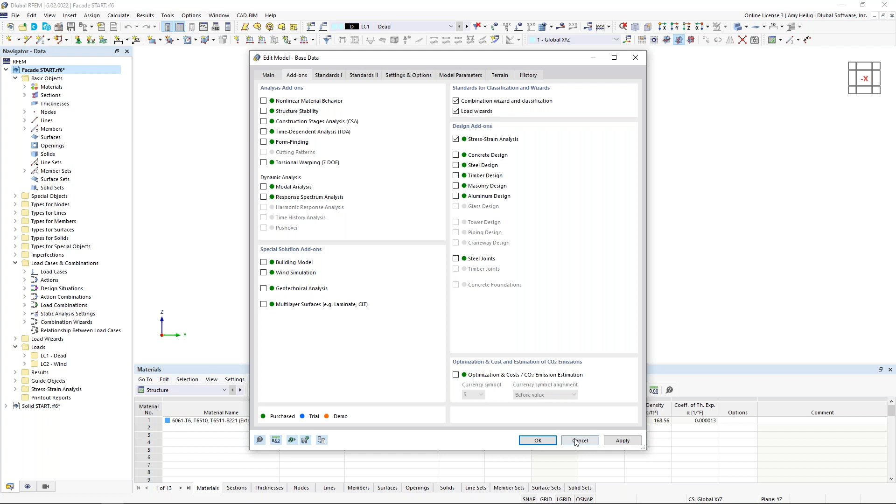Once we've activated that, we can see our 1D member elements modeled here in our graphical window. If I turn this into wireframe view, these are all going to be one-dimensional elements, and this is some type of facade wall.

I have defined the material here for all of these members as 6061 T6, and this comes directly from the ADM standard. If we take a look at our material database, notice I use my filters on the left to filter to the ADM, and under the 6061 category, I chose this particular material for extrusions.

If we take a look at the cross sections defined within this model, we have a couple of them here. These are basic parametric sections where I could input the dimensions, and the program will automatically calculate the cross-section values for me. Same concept for this second cross-section, notice I just rotated it 90 degrees here.

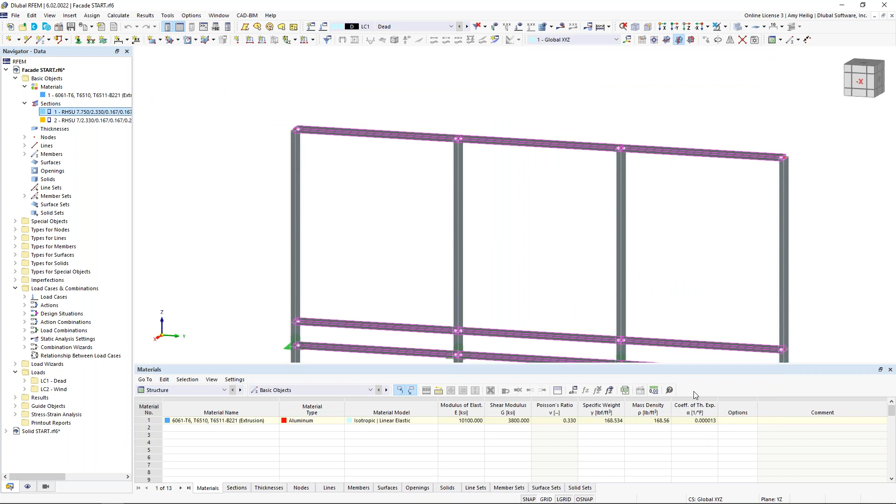So I have modeled all of these members, and the program has gone ahead and broken some of these apart here. Perhaps we'd like to design these columns as one continuous member, and even though those members are broken apart, it's not a problem, as we can create what's called member sets. If we highlight all of these single elements here, and we'd really like to design them as one continuous member, we can always right click, and under the member option, we have what's called create member set.

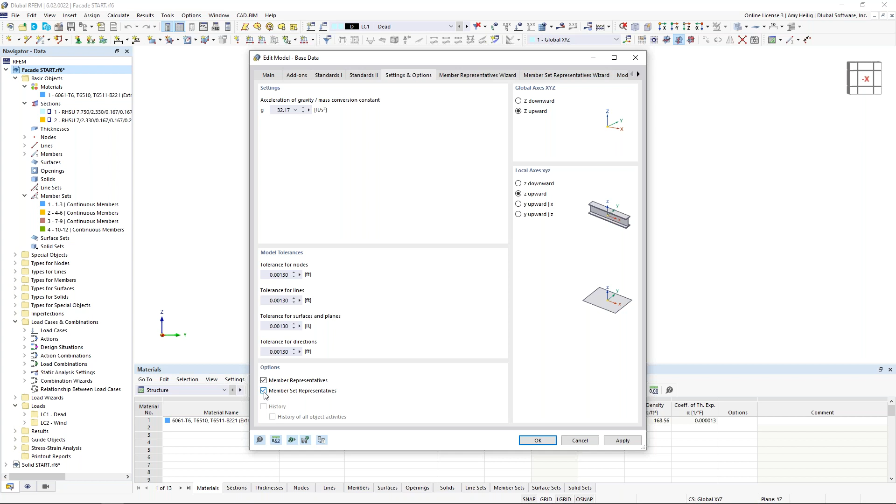The program will automatically group all of those together, and now we see them available in our navigator on the left. I also want to go back to our base data here by right-clicking on the model name, and under the settings and options, I'm going to turn on the member representative and the member set representative, so notice we have a couple additional tabs up here at the top.

The program can group together members that have similar materials, cross-sections, lengths, as well as several other options. Once we activate these member representatives, we also see them available on the left-hand side, and if I turn this into wireframe view, we'll also see those red and blue symbols grouping those similar members together.

And this will come into play later on with our stress design. I've also applied a couple of supports here. You'll notice the nodal supports applied at the center line of these small segments, and then we have a sliding nodal support down here at the bottom. So now moving on to the loads.

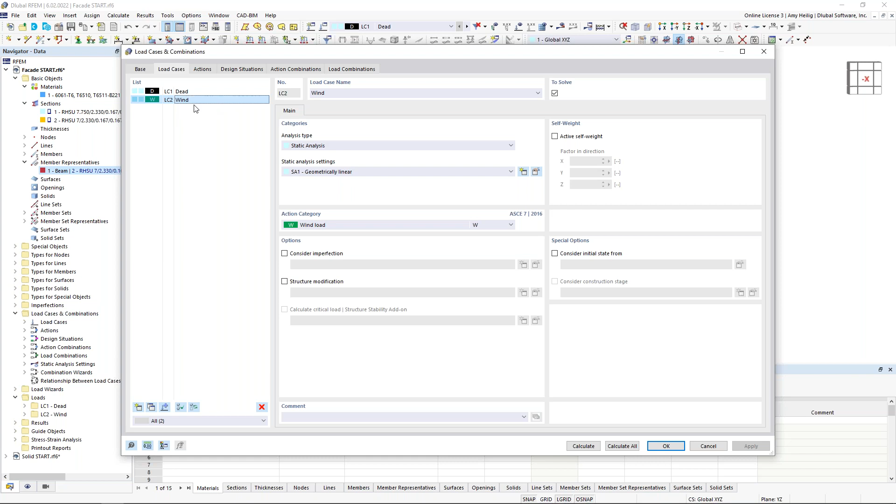I have created two basic load cases for our facade wall here, just a basic dead load. Notice self-weight is active, and I've also created a wind load case. So once those load cases are created within this dialog box, we would actually apply the loads to the structure. And again, for the sake of time, I went ahead and did that.

So if we turn on our loads for dead load, you can see that this facade wall is likely going to be supporting some type of glass panel. So I wanted to attach the glass panel and represent them as basic point loads along these horizontal members.

And if we double click on these loads, you'll see here that we can set the load type to force, but the load distribution is set to concentrated, where I can set the number of point loads along the member length. So I set the magnitude here at -0.8 kips. In the global Z direction, we have 2 point loads along the member length set at a distance of 10% of the member length, then an additional 80% of the member length.

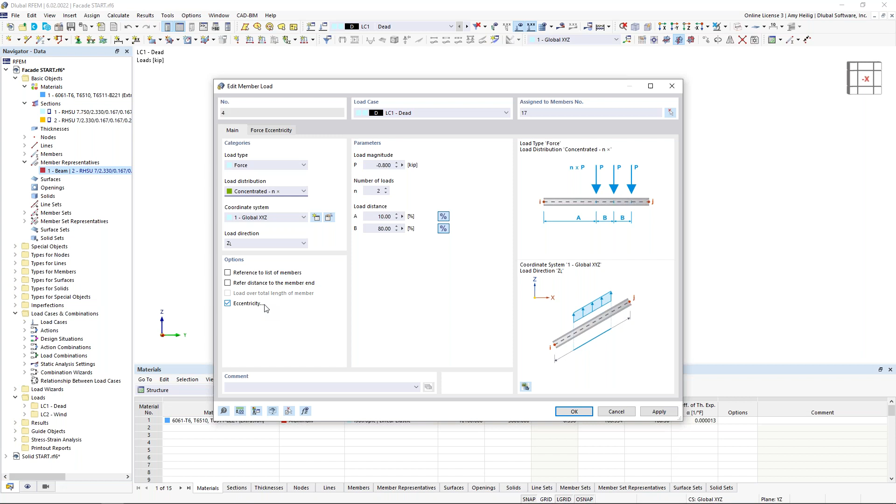And not only that, but with these glass panels that we're trying to represent, perhaps they're not necessarily applied right at the center of these members. So we have the ability here to turn on the eccentricity of these point loads, and now we get an additional tab where we can apply an eccentricity. I've set this to 6 inches in the local Z direction of the member based off the center of gravity. So now we have an additional torsional moment applied to these members based on these glass panels being attached there. You can also modify this to the shear center as well.

So I've applied these point loads not only to the bottom horizontal members, but you can see them applied up here, the upper members as well. Moving on to the wind load, we can see that wind load generated here as a lateral load, and I took advantage of our load wizard over here in the project navigator.

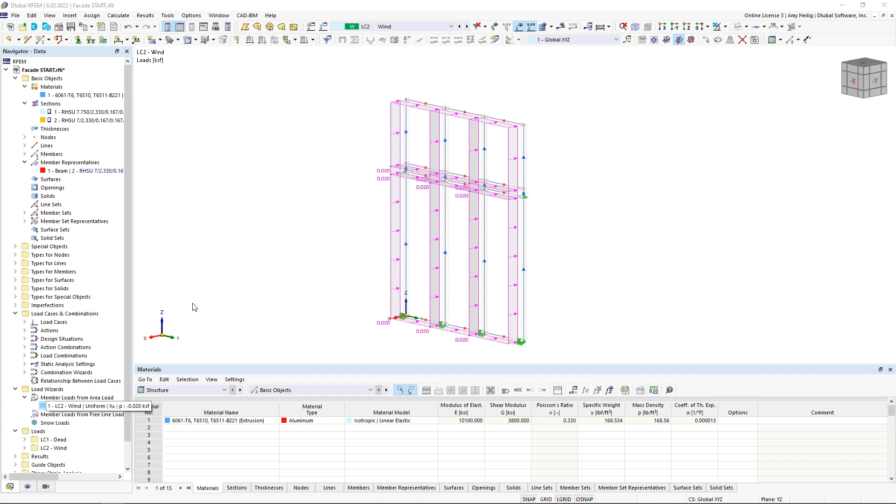What's called the member loads from area load. So if we take a look at this applied load, you can see here that I've set the load direction in the global X direction here based on the global axes. The load magnitude is set at 0.02 kips per square foot.

And then under the second tab, this is where we have two options. Either we could use the ability to select the corner points of the area load, or we can select the cells graphically, so the program can actually detect here these closed cells between members. We can graphically select them with our selection options, and when we do this, all of those cells are automatically populated within this table.

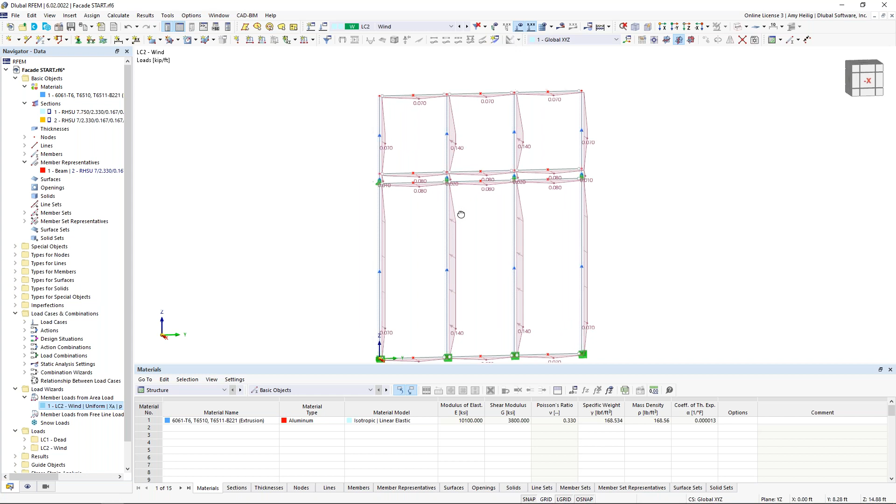So what we'll see here is that applied lateral area load based on a closed area for these members shown here graphically. We can always right click on this load to display separately. So essentially this is going to be the member loads that are applied based on the tributary area of each one of these members. But we can always right click here to uncheck this display separately for a little bit of a cleaner look.

So now that the loads have been applied to the structure, let us go back into our load cases and combinations, and we're gonna back up a step under this base data. Currently I'm generating the load combinations automatically according to the ASCE 7, but you can see here we can select the NBC, Eurocode, and many other international standards. So when this option is checked, those load combinations will be automatically generated according to the standard.

The design situations are really important. We have two design situations automatically created, LRFD for our factored load combinations and ASD for our unfactored load combinations. Notice we activate these design situations for the add-ons. So the add-on that we turn on, remember, was the stress strain analysis, so we'll be using this design situation once we get into that add-on for the design portion. Now, if I'm not so interested in my unfactored load combinations, let's say serviceability is not really a concern, we can delete this design situation, or we can simply deactivate it up here in the upper right-hand corner.

Under the last tab, the load combinations, this is where we see the load combinations individually listed out based on the ASCE 7 and only according to the load cases we have defined, that dead load and that wind load.

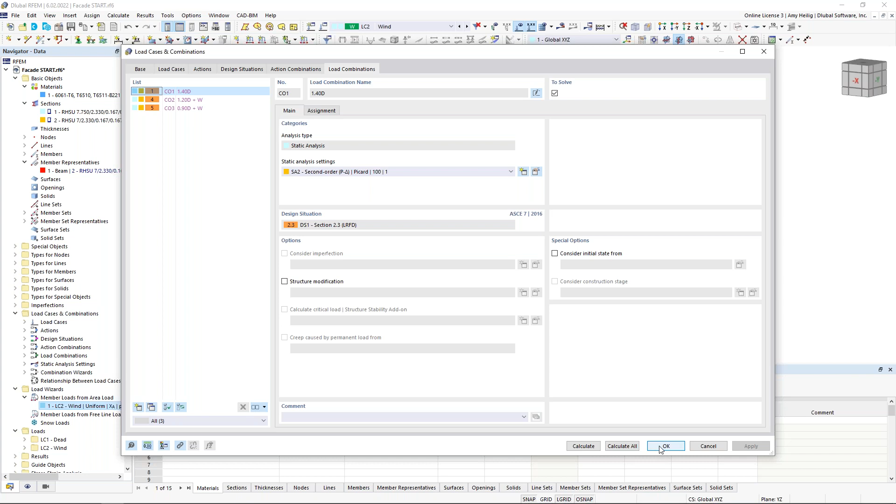Now that the load combinations as well as the design situations are set, we'd like to move on to the stress strain design configuration. We're technically ready to run the analysis, but the huge advantage of RFEM 6 is the integration of these design add-ons so that we can run one continuous workflow.

So what I'd like to do is right click on my folder here to collapse all these folders, so maybe it's not so overwhelming. Because we have activated that stress strain analysis add-on, we now see an additional folder over here on the left, and included in this list is what's called the member configurations. We'll double click on this to take a look at the default options.

Notice that these are all of the available stresses that we can calculate for these members, and that includes normal stresses based on axial loads, based on bending loads. The list is rather long, but we've taken the liberty here to suggest a few of these stresses that you might be most interested in.

For our example today, let us assume that we really are only interested in designing the von Mises stresses. So when I take a look at this, I make sure my checkbox is on, and notice for all these stresses, the equations along with the variables are listed over here on the right. And in the second column here is where we set the limit stress type.

Currently it's set to the limit equivalent stress. What this means is the program is going to refer to that ADM material to determine what the limiting stress value is. Now, alternatively, we can set this to user defined, and I can simply type in the user defined limit in this third column. But let us go ahead and leave this for now set at the limit equivalent stress.

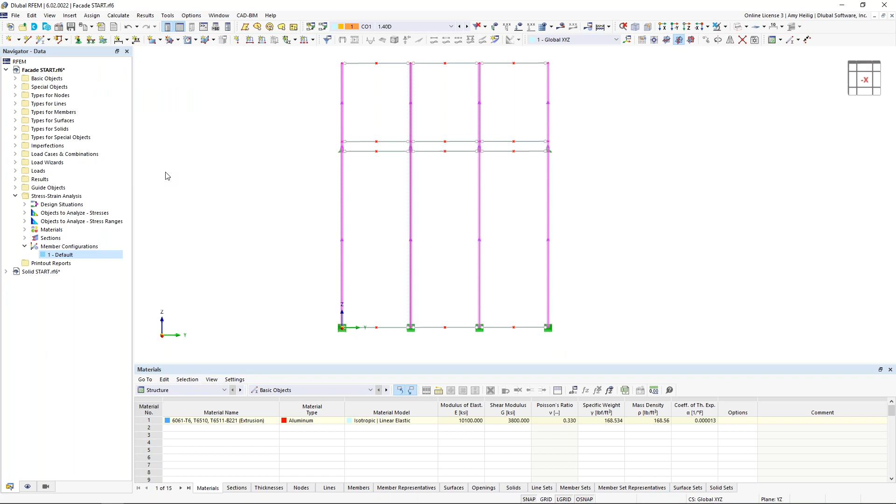The other nice thing about these configurations is that we can give this one a name. We'll call it von Mises. We don't necessarily have to apply the same configuration to every single member in the model. So if I'm interested in applying the von Mises here only to my vertical members, I can graphically select them here, and once I click OK, we'll see those members populated in the upper right-hand corner.

Now I can make a copy of this configuration, and instead of von Mises, let us turn on the equivalent stresses based on the Tresca hypothesis theory. We see the relevant equation here that will be used. We can give this one a name that will be called Tresca.

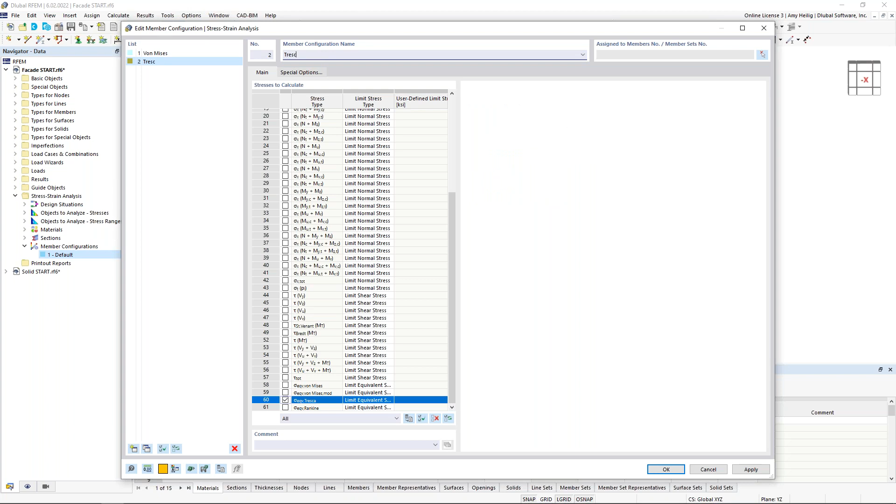And we're going to assign it to all of our horizontal members. So we can select these members one by one here using our selection box. Once we're done with this, we click OK and we see the members populated in the upper right-hand corner.

So we are now ready to run our calculation. We can go to calculate, calculate all. The program will generate the mesh. It will move through the load cases and combinations for the static analysis, and then it will move through the stress design.

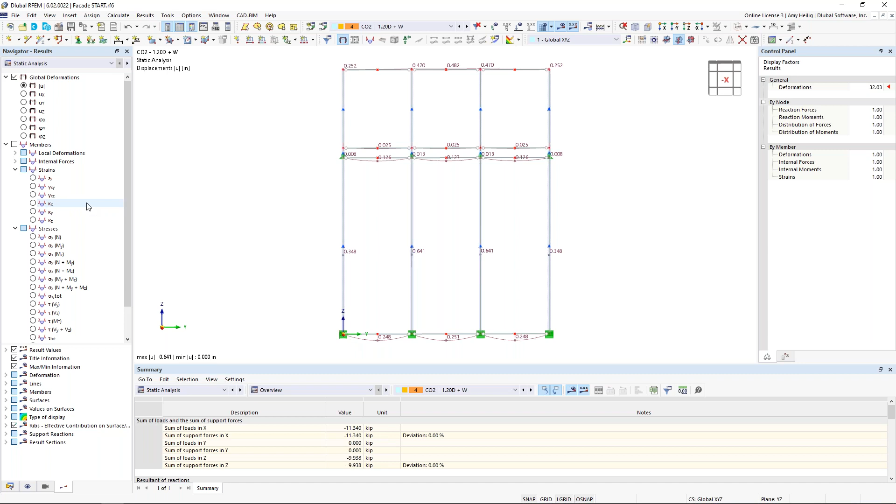So once this calculation is done running, you'll notice that we can view any one of these load combinations, for example, from our drop-down menu. And over on the left, we have both the static analysis and the stress strain analysis. So if we start off with the static analysis, we can view information like our global deformations, our support reactions, but of course, we're interested in here all of the available stresses as well.

So we can view these stresses on the member, including normal stresses, shear stresses, of course, the von Mises stresses. So again, this is the static portion of the analysis.

But we're also interested in the stress design based on those configurations that we've just set. So what we can do here is jump to the stress strain analysis within this dropdown. And if we take a look at our table results, you'll notice that we actually get an error for each one of these stress ratios. It just simply says non-designable.

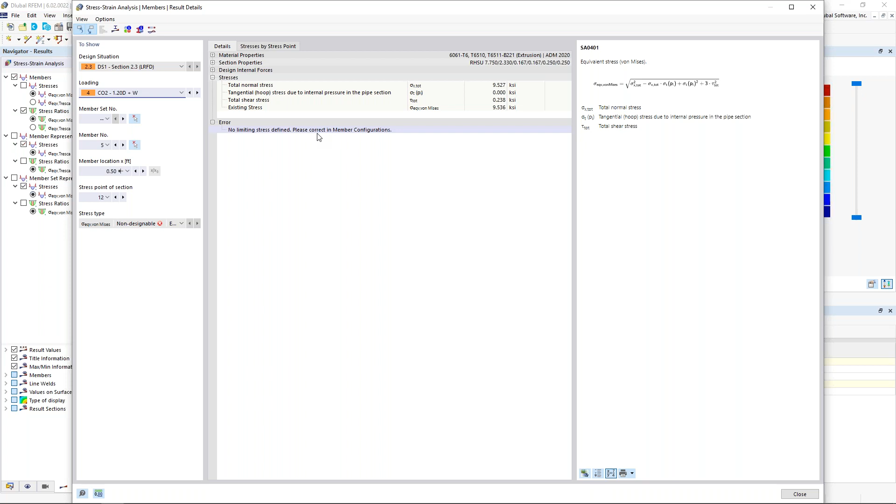So we'd like to take a look at this in a little bit more detail. I'm going to go into my result details here, and this is going to give me a little bit more information. It tells me no limiting stress defined. Please correct in the member configurations.

Well, if we refer back to our aluminum material, and I'll visit this here under the basic objects, the materials, we take a look.

You'll notice that the material values have many different values set here under the strengths, depending on if the member is in tension, compression, shear, and so on. Aluminum materials are a little bit different than, say, what we would see with steel. A36, for example, has a very clear yield strength of 36 KSI, but aluminum ADM materials do not, so the program simply doesn't know which one of these to refer to.

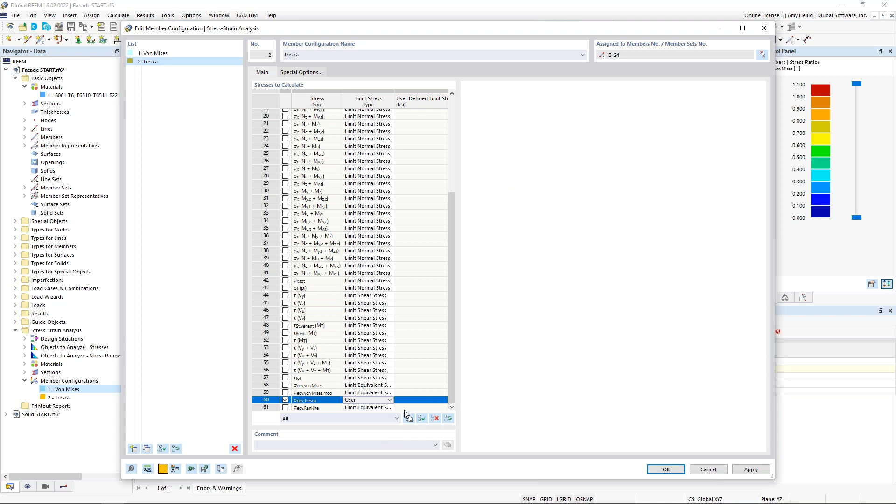We can easily fix that by going back to our member configurations. Under our von Mises configuration, instead of using the limit equivalent stress, we set this to user defined instead, and pick one of those strength values for that ADM material, such as 35 KSI. Under the Tresca, we need to do the same thing, setting this to user defined and also 35 KSI. We click OK.

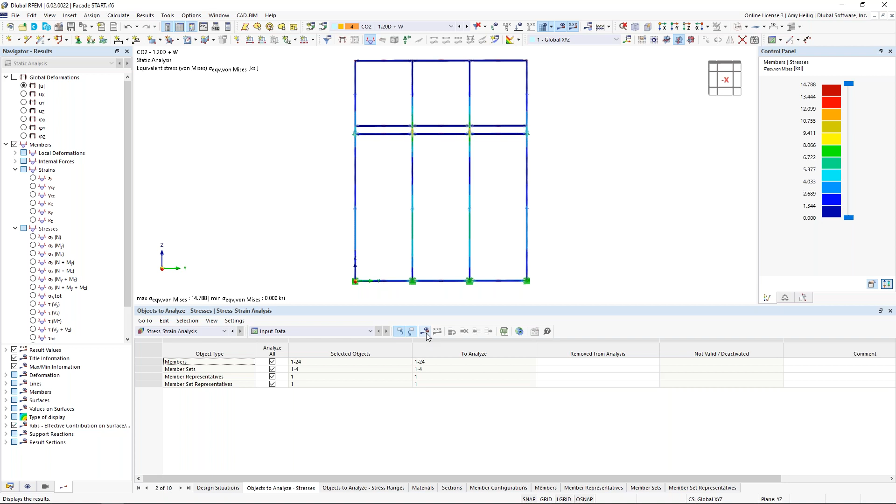So if we revisit our stress strain analysis, we see our input data and the design situation. Remember that LRFD design situation, and we're designing all of our members. Our static analysis remains the same here, but we do need to rerun the design portion according to this add-on.

We'll go ahead and initiate that, and now we should see some results available in our table format. We can take a look within this dropdown at the stresses on members. So we have our column here of existing stresses for each of these members, but we also have the limiting stress of that 35 KSI, and ultimately we're getting a stress design ratio.

Now we also can view these stresses by member set. Remember those continuous members we created for these vertical columns - we're also going to see our stress design ratios for each one of these continuous members. If you also remember, we activated the member representative, and we're only getting one value here. We can think of this more so as an envelope solution, grouping together all of those horizontal members, giving you one value for the existing stress, the limiting stress, and the stress design ratio. Same concept for the member set representatives.

The other thing we can view for any one of these results in our table format is to take a look back at these result details. If you remember, this is where we got more information about our error message, but now that it solves, what we actually see is the stress ratio. We see that same equation given to us on how we're going to calculate, for example, the von Mises stresses. We see all of our variables given.

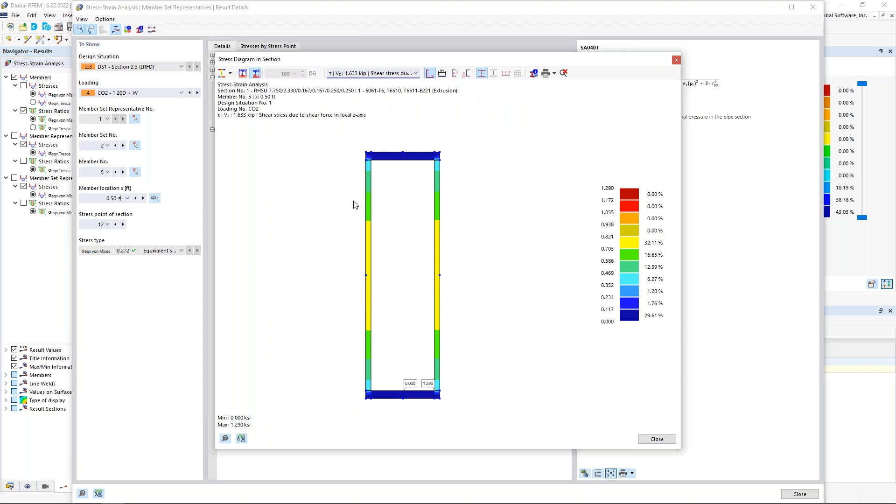What else is nice within these details is we can turn on the stress diagram within this section. So currently we're looking at that cross section at the location of x equals 0.5 feet along the member length, and we're currently viewing those von Mises stresses graphically, but we can use the dropdown to choose the third option, stresses, here as well. This is going to allow me to view all of the normal stresses. Perhaps I want to take a look at the shear stresses. We can add this information to our printout report and get a little bit more information about what's going on for this particular section at this X location.

Now, of course, in addition to the table format, we have all of our information shown graphically here under the stress strain analysis. For example, we can view the stress design ratios that are currently turned on according to Tresca, or perhaps we want to turn on the stress ratios according to the von Mises.

Okay, so that will wrap up this first example with one-dimensional members. For our second example, I'm actually going to create a new file because we will model this one from scratch. Pretty basic structure, so we'll give this the model name of base plate, whatever that may be, and the type of model will be set to 3D. Under the add-ons, again, we want to activate the stress strain analysis, and we're also going to activate for this second example, the nonlinear material behavior.

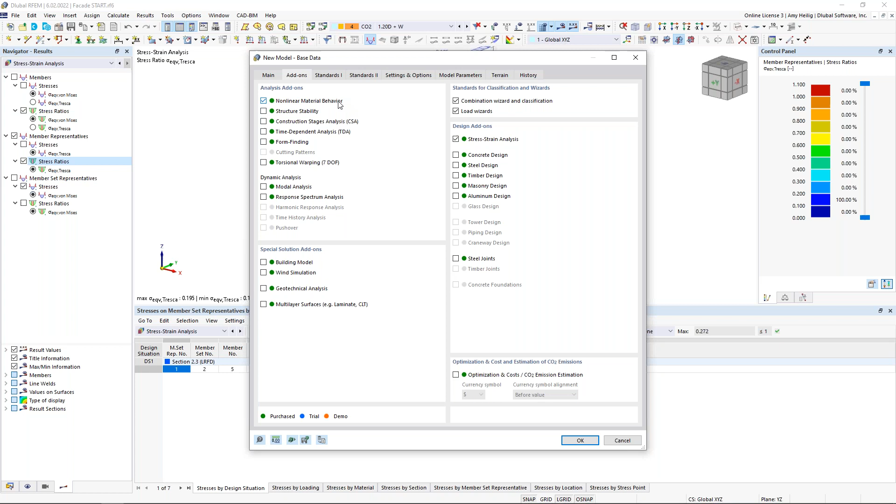So we'll get into this a little bit later on, and we can click OK. So now we're presented with a brand new model here within RFEM.

The first thing I'd like to do is right click on my grid settings down here at the bottom. Currently everything is based on a spacing of 1 foot, so I'm going to go into my units and instead of using the length unit of feet, I'm going to change this to inches because we're going to be working with a much smaller scale here. I click OK, and instead of my grid point spacing at every 12 inches, we'll set this to every 1 inch, and we click OK.

So we zoom in here, and now we see our much smaller drawing grid. We'll begin by drawing a new surface within our toolbar up here, and we'll choose rectangle via center.

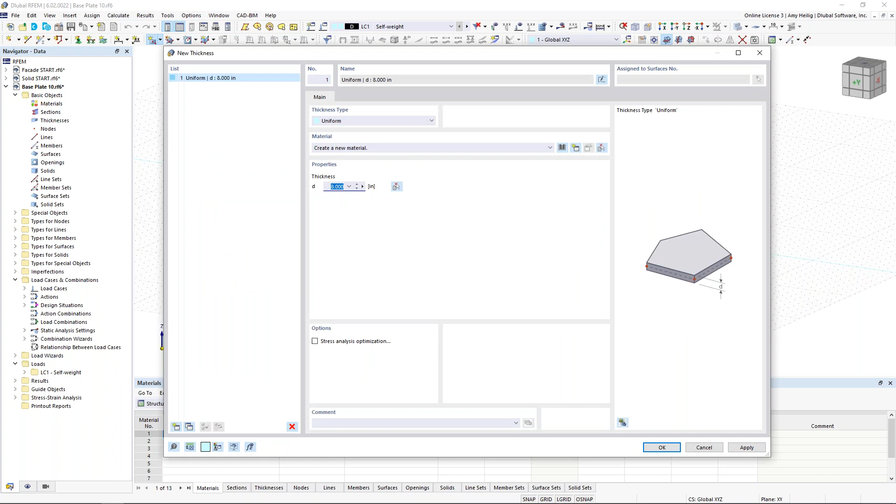We need to generate a new thickness and material for this surface, so we create a new definition type here. The thickness is going to be set at 0.5 inches, and we need to create a new material from our material database. We can use our filters on the left to choose steel, to choose AISC 360 for example, and we can choose A36 for plates. Now that this thickness and material have been defined, I can click OK through these dialog boxes.

I will snap at the origin here, and I'll make my second click at a point of 10 inches in both the X and Y directions, and we have our first 2D surface element generated here.

Now I'd like to add in some openings. This will essentially be our base plate, and we add in the openings to represent where those bolts will connect the base plate to the underside of the surface.

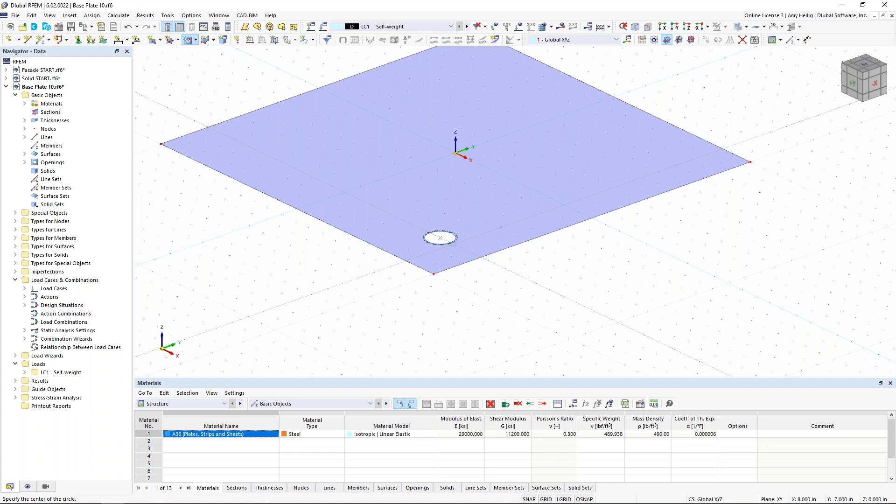We can do so in a similar manner by creating a new opening, and we'll choose the circle option. Then I can just click directly on my drawing grid, and set my radius by typing it in on my keyboard, such as 0.75 inches. I hit enter, and now we see that opening generated here on the surface.

I'm going to represent my bolt elements with a new nodal support, so I create a node to begin with by directly clicking here right at the center of that opening. I right click to exit, and we're going to create a new nodal support.

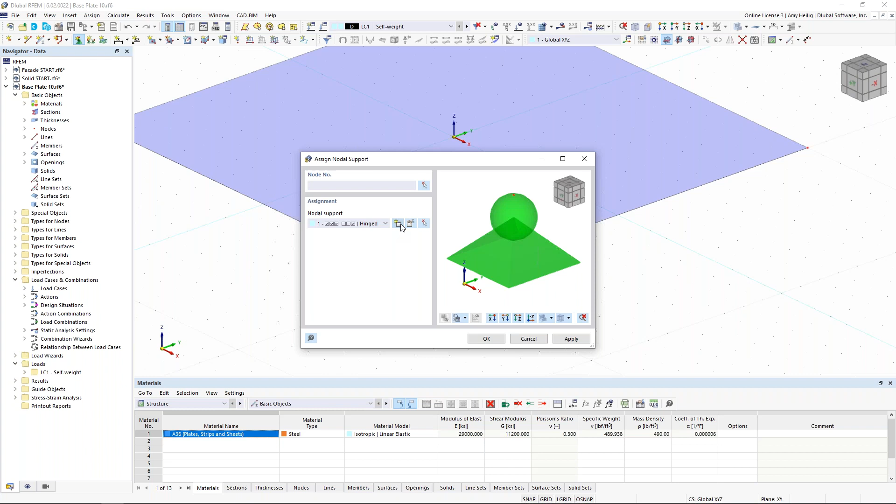I'm going to generate a new nodal support definition here as well. What I'd like to do is restrain translation in the global X, Y, and Z directions, but I'm going to release rotation about those global X, Y, Z. So this pin nodal support is going to represent that bolt taking over those tension forces. I click OK once again.

I'll snap here to that newly generated node. I right click, and we can even right click on the display of this nodal support to decrease the size to something much smaller, so it kind of fits in with the size of our base plate here.

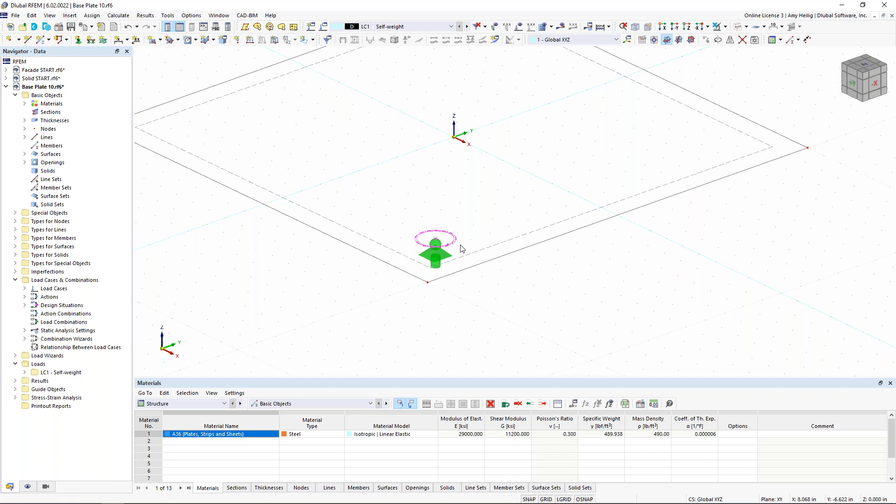I'll convert this to wireframe view, and I'm going to highlight all of these elements that I just generated. What I want to do here is make a copy of the opening and the nodal support, so we'll go to our rotate copy tool. We will create 3 copies, rotated 90 degrees about the origin. We click OK, and now we can see the rest of those openings and nodal supports generated here.

Now, the problem is that none of these nodal supports are currently connected to the base plate. That's just because they're sitting in the middle of these openings, but it's not a problem because what we can do here is choose the option to create a new surface by selecting the boundary lines.

And instead of the stiffness type being set to standard, we can choose this option here, rigid. So we'll fill in those openings with a rigid surface. Notice I don't set a thickness, I don't set a material - that's simply because the stiffness is really, really high for this particular stiffness type. So when I click OK, I can just click around these openings here to essentially connect that nodal support back to the base plate.

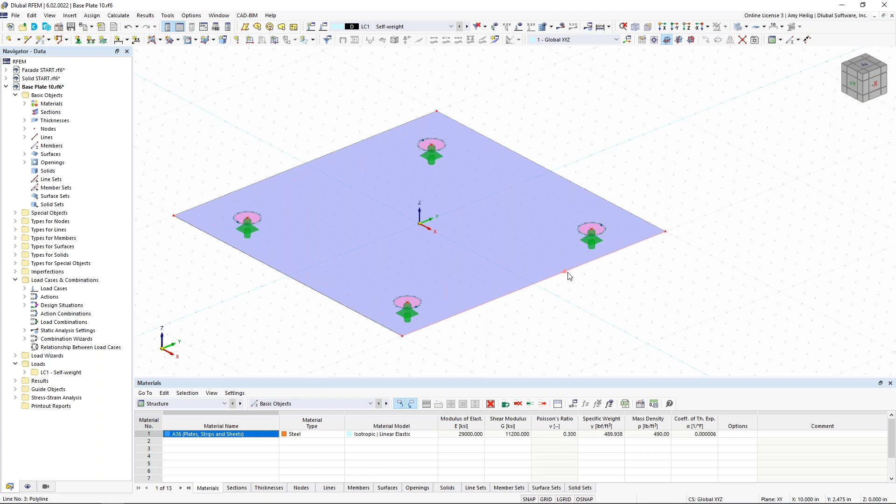So now we'd like to move on to modeling the column element. There are many different ways to do this, but I'd like to show you a quick trick we have in the program. I'm going to modify my drawing grid in the vertical direction, and create a new single member, just like what we saw in the previous example - a one-dimensional element.

Under the section is where we create a new cross section. Instead of one of these parametric sections, I'll take advantage of a standardized section, which allows me to use my filters similar to our materials on the left-hand side. I can filter to AISC 15, choose a W shape, scroll to the bottom where all shapes are listed, and choose a W8 by 35.

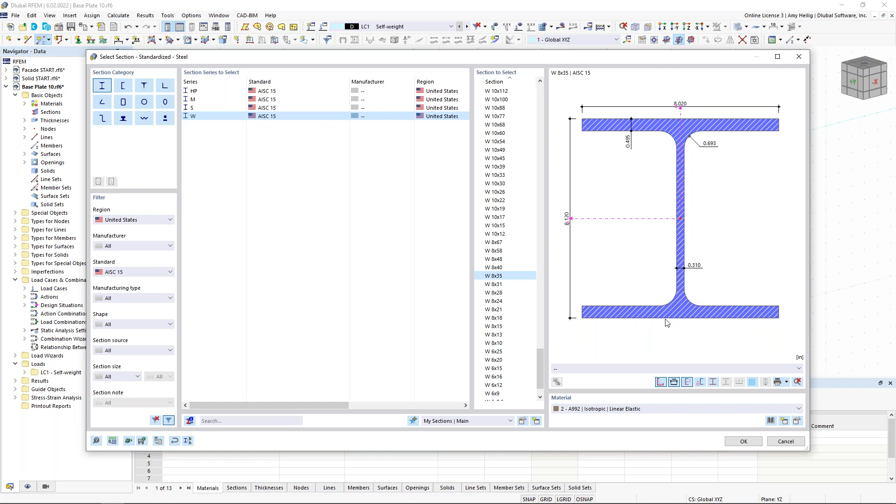Now we also need to generate a new material. We access our material database using our filters on the left, but this time choose A992. Click OK, and that new material is associated with this W8 by 35. I click OK, snap at the origin, and my second point is up at 40 inches in the vertical direction. We have our column generated.

But the problem is when I turn this to wireframe view, this member is just a one-dimensional element modeled at the centroid. We want to convert this to 2D surfaces so we can do an in-depth stress analysis and design. We can right-click on this member, and under the members menu, generate the surfaces from that W8 by 35.

Notice everything was converted to those 2D surfaces. The flanges, the web, everything from that W8 by 35 was converted into surface elements, including the thickness as well as the material. So we don't need to make any modifications, assuming we still want that same cross section.

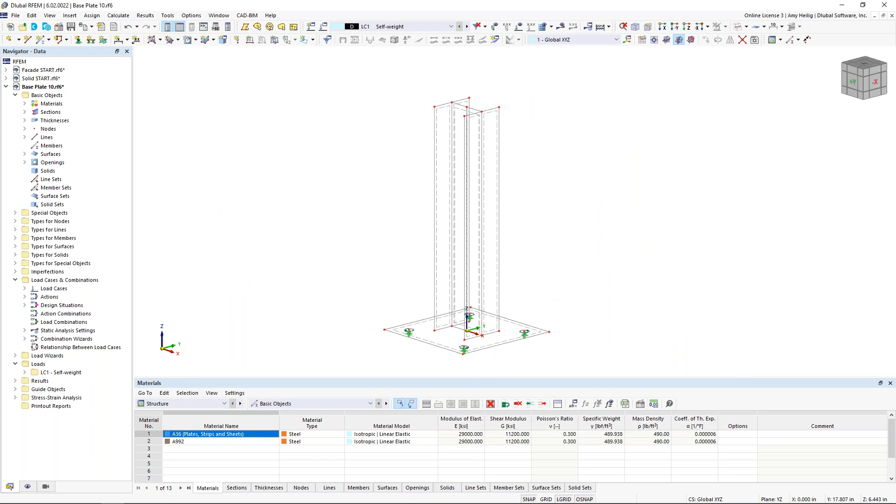Now that we have modeled this column, we need to apply a surface support down at the bottom. With downward deflection, this base plate is going to bear on some other type of surface that we didn't model today. But in uplift, we want that surface support to fail, and instead we'd expect our bolts, represented here with nodal supports, to take over those tension forces.

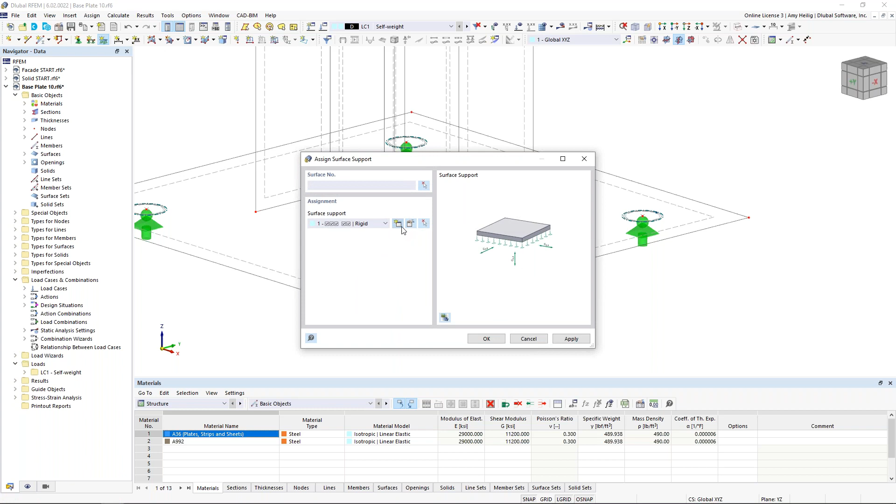So we create a new surface support within our tools, and create a new definition type. We'll restrain the shear based on the local XZ and YZ axes of this surface. For my vertical translation, based on the local Z axis, I'm going to set a spring constant of 1e6.

It's recommended in almost all cases with a surface support not to fully fix it in the vertical direction - we get better convergence in the calculation when we set a spring constant instead. And we want to take advantage of this nonlinearity. RFEM is a nonlinear analysis program, and all geometric nonlinearities are automatically included within the base program.

This is where we can set failure if positive contact stress occurs in the vertical direction. So with uplift, we should see that support completely fail, but in downward deflection, that support will be engaged again. We click OK, snap on that base plate, and see that surface support applied here.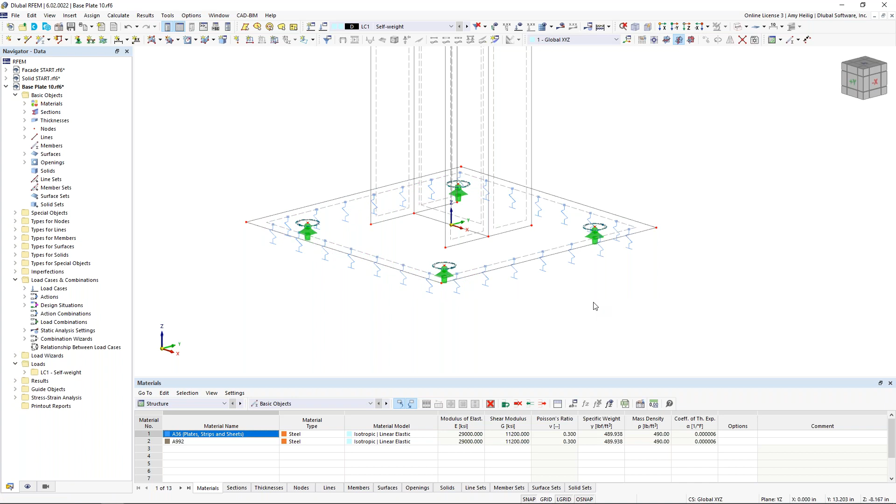Similar to the nodal supports, we can right-click and use our slider to decrease the size of this. We can also increase or decrease the number of elements we're seeing here depending on what we see fit for our model. All right, so essentially the modeling portion is complete.

Let us touch on the FE mesh. If I go to calculate, generate mesh, what you'll see is that the mesh is entirely too big - we're getting very few mesh points, which is not going to be an accurate analysis. So it's very clear that we need to refine this FE mesh.

Going to calculate, we have mesh settings. Instead of the default 1 foot or 12 inches for the target length, we can set this to something much smaller, such as 1 inch. I click OK and apply, and the program will generate that FE mesh, which looks much better. But if I zoom in on these openings, I really only have 4 mesh points around the circumference.

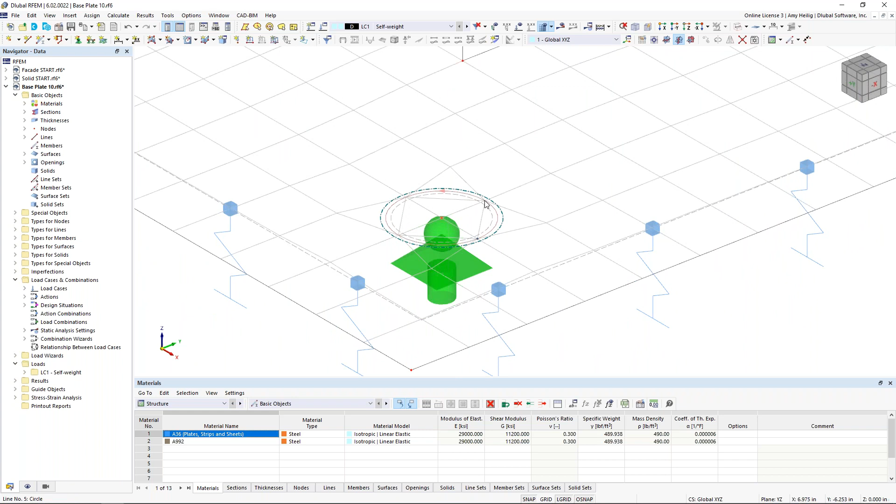So perhaps we want to refine the mesh a bit more around these openings. I can hold down my control key to select all 4 of these nodes, then double click to activate the mesh refinement under these particular node numbers. We get a new tab where I can create a new nodal mesh refinement, setting the radius to 3 inches. The inner target length will be 0.1 inches, but we'll transition back to those global settings of 1 inch. I click OK, then OK again, and now we see the FE mesh refinement symbol shown graphically within the model.

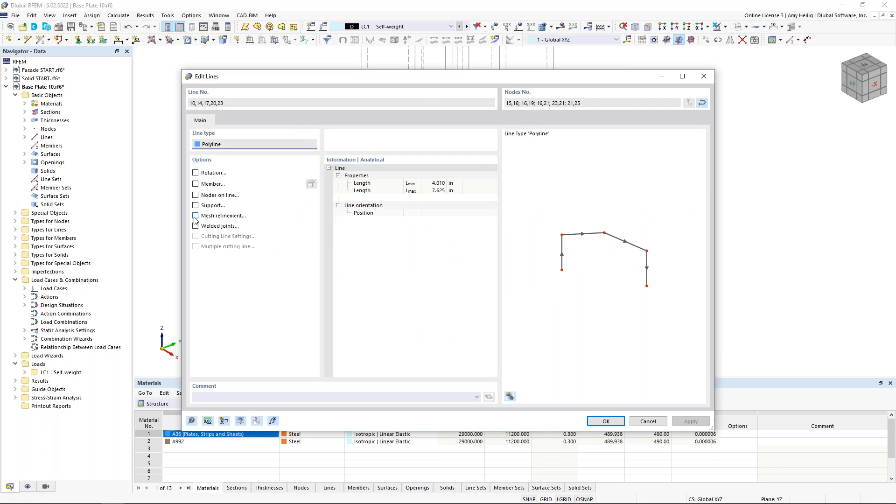Perhaps we'd like to do the same thing at the base of the column and refine the mesh a little further around these lines. I hold down control to select all of them, then double click to edit the line, and in a similar manner to our nodes, we can activate the mesh refinement for these particular lines. Under the mesh refinement, we create a new definition and set the target length to something like 0.2 inches. I click OK. Then we go to calculate, generate FE mesh, and we see a much more refined FE mesh at the base of the column as well as around those openings.

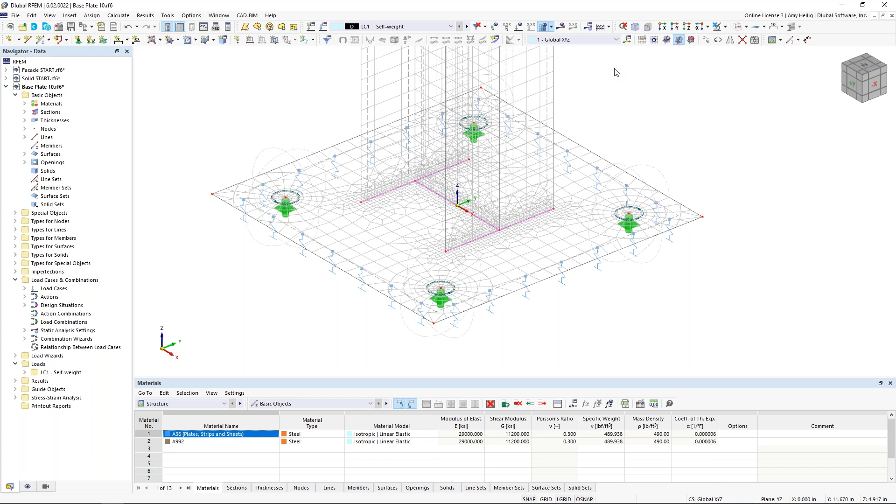So everything seems to be good to go now. Moving on to loading, I'd like to visit my load cases and combinations. We have a default load case always created called self-weight, and we'll rename this one to dead load, leaving self-weight active. I'll create a second load case for our simple example today called live load, with the action category of live load. Now that these two load cases are generated, we'd like to actually apply the loads to the structure.

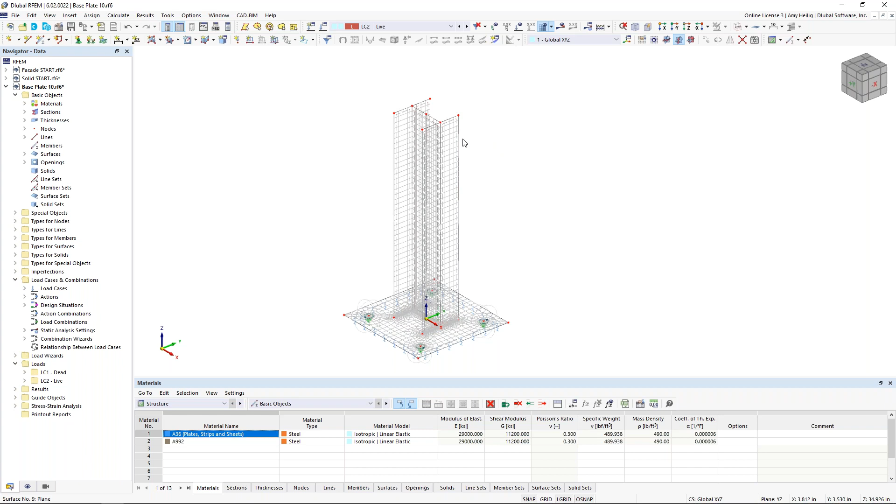The loads are going to be applied as a point load at the top of this column. But the problem is, if we apply a point load as the model is now, we're going to get a singularity because that load isn't distributed over the entire face at the top of the column. We can fix this by drawing a new surface, with the type as rectangle, and setting the stiffness type to rigid, same as we used at the openings where our bolts are located. I click OK, click once on the left of the structure and a second time on the right. If we turn this to a rendered view, we can see that rigid surface shown here.

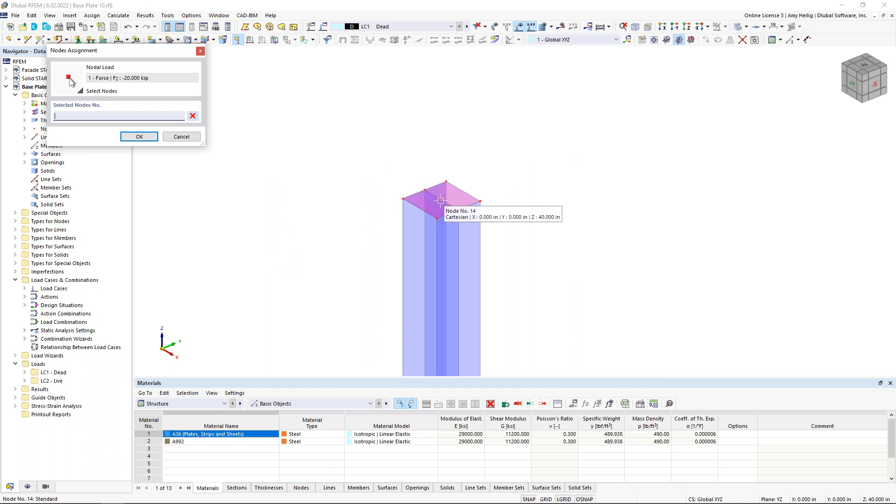Now I can create my first point load by activating a new nodal load. I get my dialog box where I change the load case to dead load, and set the force as -20 kips in the global Z direction, graphically choosing node number 14 to apply it. If I hit apply and next, the program automatically applies that load in the background, but I'm still in the same dialog box so I can use the dropdown to choose live load, modifying the magnitude to 5 kips in the global Y direction. I click OK, select this node, click OK again, and we see that lateral load applied here.

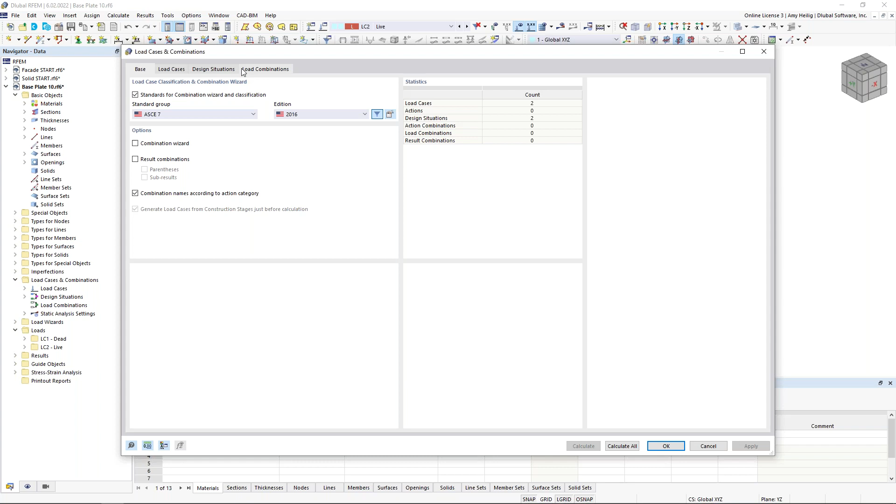So going back to dead load and live load, both of those loads should be sufficient. Going back into our load cases and combinations, we've created these load cases, but we want to combine them into a load combination, and we also need to check our design situations. Under the base data, if we'd rather manually create those load combinations instead, all we need to do is turn off the combination wizard, and notice a few of those tabs disappeared at the top. This gives me the ability to still create these design situations, automatically generated based on ASCE 7. But perhaps I'm not interested in my ASD design situation, so I can completely delete it.

I can even take this design situation here and rename it if I'd like, so we'll just call this one Design Situation 1. Maybe it's a little bit more code independent, but it's still active for this stress strain analysis.

Remember, we have to have a design situation that all of the load combinations are placed under for these add-ons. So looking at our load combinations tab, it's empty because we need to manually create these. I'll generate a new load combination here.

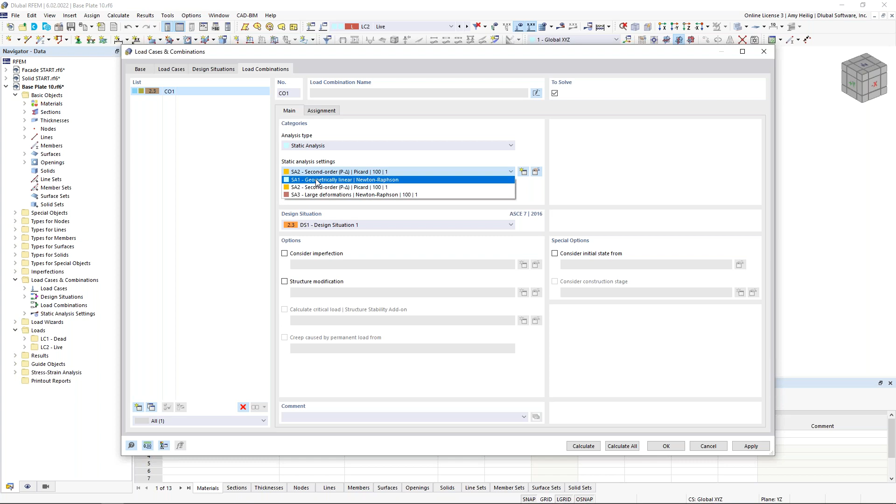Perhaps we change the static analysis settings to linear first order rather than second order. Under the assignment, we can select both dead load and live load. We could adjust the load factors if we'd like, but we'll go ahead and leave this as a simple 1.0 dead plus 1.0 live. We click OK, and now we should see that load combination available to us along with both of those loads.

being applied here graphically. All right, so let us talk about those stress strain configurations. Remember, because we have activated the stress strain analysis, we have this folder available to us over on the left-hand side. I can right-click here to collapse all of those again so it's not as overwhelming.

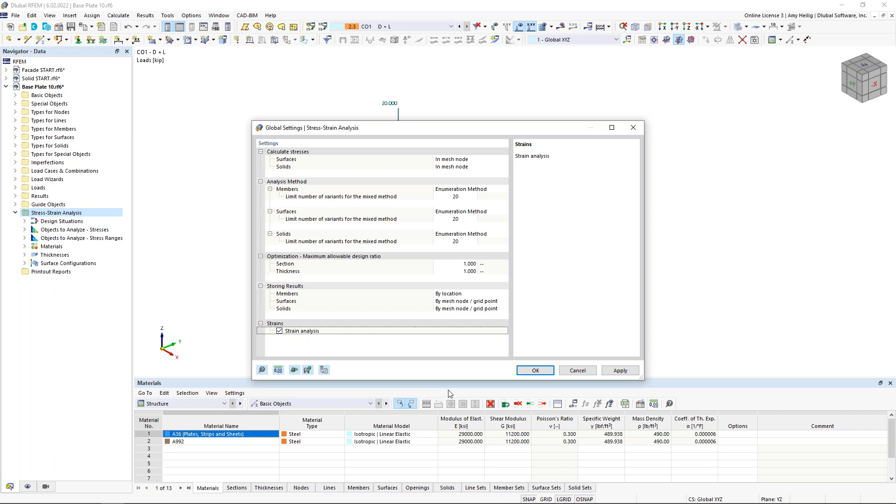The first thing I'd like to do is to right-click on these settings for the stress strain analysis. Now, by default, in order to design the strain, it's actually turned off. We'll still get the strain analysis results in the static analysis portion, but as far as the design within this add-on, we can activate it here with the strain analysis. So we'll see how that looks a bit different from our previous example.

And I click OK. So now instead of member configurations here, we have surface configurations because we have only 2D elements within this model. So I take a look at my configuration details, and this list should be a little bit different than what we saw with our members. So we see all of the available stresses we can calculate, the relevant formulas over here on the right-hand side.

And again, we've taken the liberty to check on a few of those that we think you'd be most interested. But for us, what I'd like to do today is to only activate the von Mises max, and we see the equation given here. So just to keep it simple for this particular example.

Now, the limit equivalent stress that it's going to refer to, this should not be the same problem that we had with the ADM material. We know with A36 material, with A992, we only have one yield strength, so that should be fine for this example.

Notice under these strains, we have all of the available strains that we can go ahead and design as well. Now I'm going to turn most of these off. We'll only activate the von Mises strain. Notice you can set here the plastic strain limit.

So this strain limit is only applicable when we're actually doing a plastic nonlinear material design, which we will be in just a minute, but just know that the second column is only available for that nonlinear analysis, not for the linear analysis, which is what we're currently under.

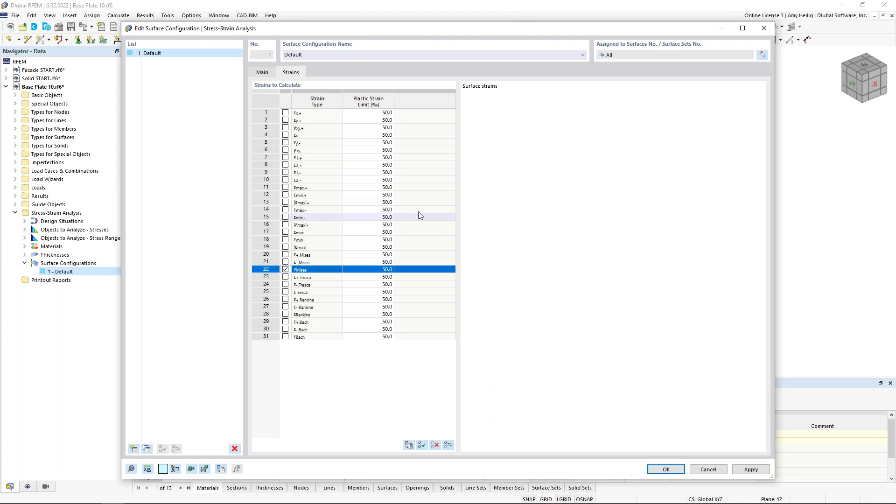So this is going to be assigned to all of the surfaces. I click OK. If we want to take a look at here within our dropdown, the stress strain analysis input data, remember we have our single design situation here. The objects to analyze, all of my surfaces are turned on.

We also can turn on what's called the stress ranges, so we activate this for all of our surfaces. What this just means is that we'll be able to give you the minimum stress, the maximum stress, and the stress range for each one of those surfaces. We'll see what that looks like in just a minute.

So we're now ready to run the calculation. We go to calculate, calculate all. The program generates that mesh. It will now run through the load cases and combinations for the static analysis, and then we move on to the stress strain design.

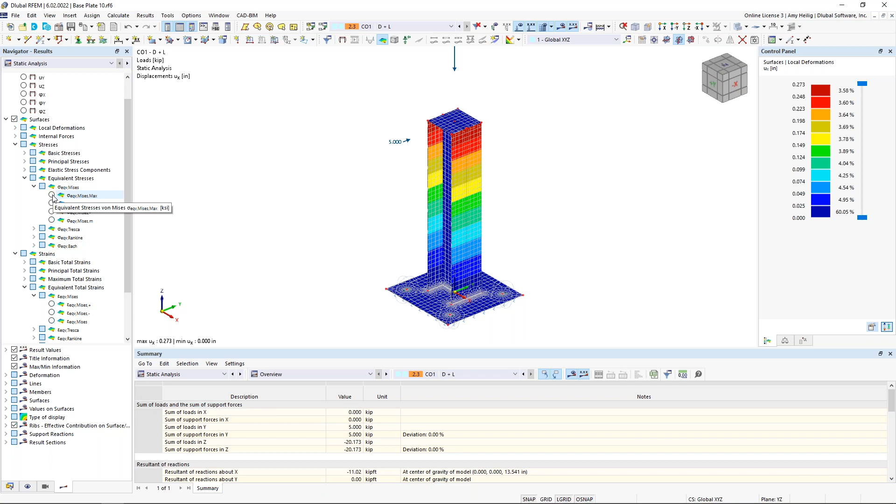So we're currently looking at our load combination, and we see here our static analysis results. We currently have the deformation turned on, but we're probably again most interested here in topics like our surface stresses, and we can view the surface strains. Now, again, with the static analysis, we have everything available to us. It's just the design portion that we limited it to the equivalent von Mises stresses, for example.

But we can take a look at here the static analysis for those von Mises stresses. And I scroll in here, we certainly have some high stress points.

These maybe could be attributed more to a singularity. But notice that the stress value here at these high peak points is 163 KSI. There's something I'd like to discuss further that's really important when viewing our results on these very small scales for steel type connections, for example.

Under Calculate Result Smoothing, these are the various options for how we're going to smooth the results so we can present them with ISO bands or colors in our navigator. They can affect how we're viewing the results depending on which setting we have set. So let me go back to the PowerPoint to explain in more detail. I have two adjacent surfaces, surface 1 and surface 2, with the dividing line right down here in the center.

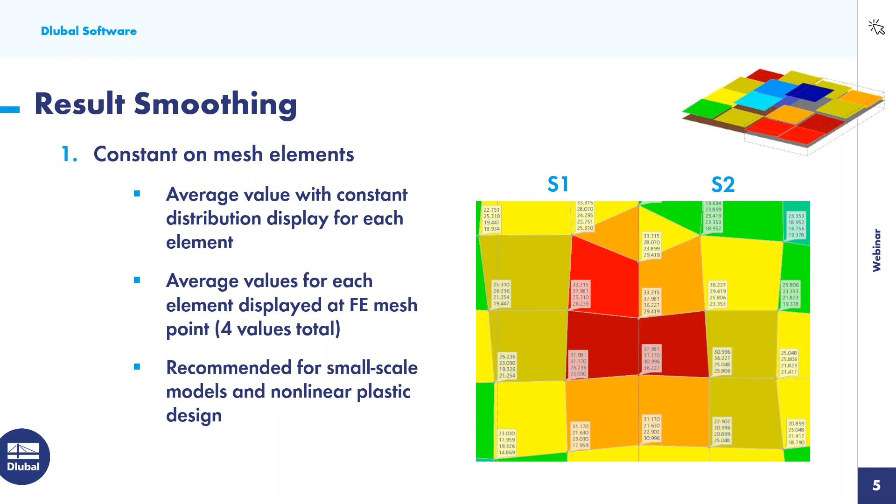The first option in that list is constant on mesh elements. We're going to average out the value within each FE element and show a constant distribution display, so each FE element has a single color applied to it. However, each element is very independent of the one next to it. The average values for each element are displayed at the FE mesh point, so this is 4 values total, since we have 4 FE elements surrounding a single point. This is really recommended for small scale models, such as what we're looking at today, as well as nonlinear plastic design. We'll see how our results look when we change to this setting.

The second option is non-continuous. This is where we have a varying distribution over each element, so for each FE element we might have multiple colors, but there's still a non-continuous display between adjacent elements—each element is still very independent from the one next to it. We display the corner values of each FE element at every FE mesh point, for a total of 4 values based on those 4 FE elements surrounding that single mesh point.

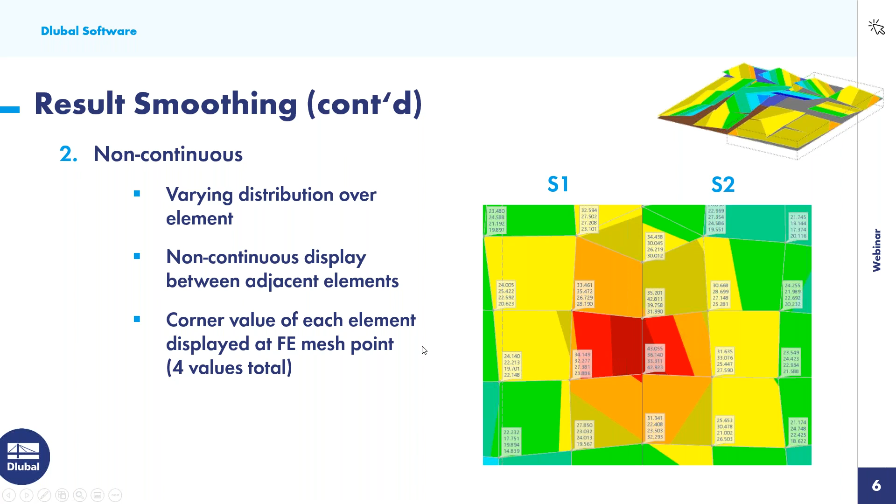The third option is continuous within surfaces. This is the default option and currently what we are viewing in our example today. We use a smoothing algorithm to smooth results between all elements within a single surface, so all values for surface number 1 are tied together, yet it's still a non-continuous display between adjacent surfaces—each surface is independent, and we're not tying those values together. The average value of the elements is displayed at every FE mesh point, so we have 1 total value for each surface, but 2 values where the 2 surfaces butt up against each other.

The final option is continuous within all surfaces. We use the smoothing algorithm to smooth all results between all elements in the model, and there's now a continuous display between adjacent surfaces. So we won't see that boundary line between surface 1 and surface 2, and can tie all of those isobands and colors together. We'll also have 1 average value of each element displayed at the FE mesh point, so now 1 value is given here.

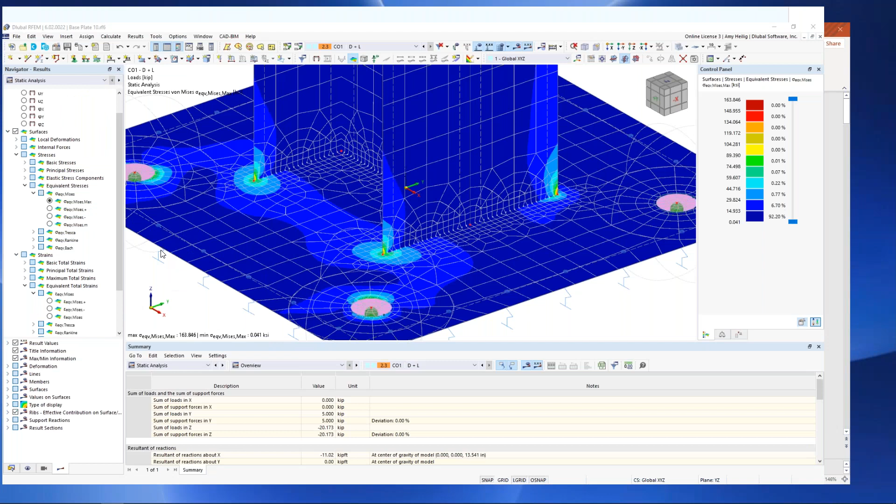So let's go back to our example to see how this really affects our results and if it makes that much of a difference. Again, the default option here is continuous within surface sets, or otherwise within surfaces, and our von Mises stress is 163 KSI.

I'm now going to modify this to constant on mesh elements. I click OK, and remember that's the first option we covered in the PowerPoint, where each FE mesh element has its own average value. Notice my von Mises stress is now 90 KSI—it was significantly reduced because we're no longer trying to tie all of those stresses together within a single surface. This is why it can really impact how we're viewing our results. Notice I didn't need to rerun the static analysis.

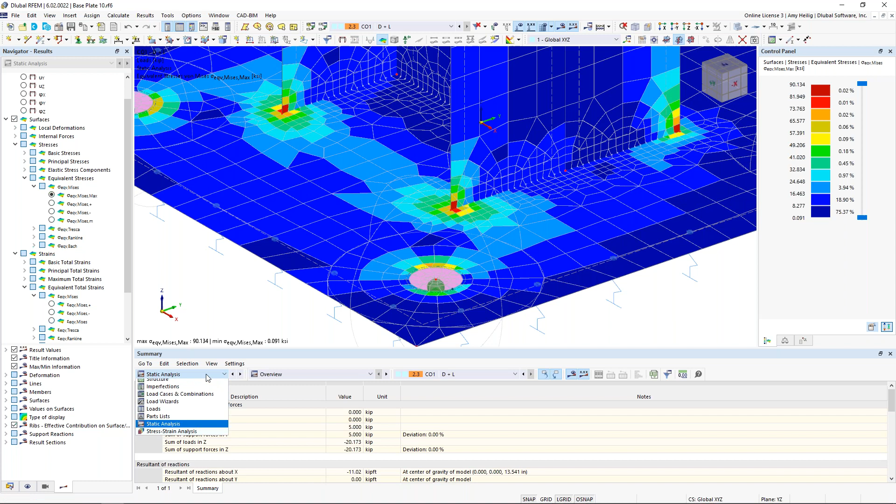It's just really how our results are presented to us. But what I would like to do is go to the stress strain analysis here, and we do need to rerun this calculation. The program says, well, wait a minute, it looks like the stresses I need to compare have changed. So now we can view here the stresses on the surface.

When I take a look at my existing stresses in my first column here, the limiting stresses are either 36 KSI for my A36 material or 50 KSI for A992. And ultimately, we're getting a stress ratio. What we see here is the stress ratios are very high, 2.06 for example. We clearly know these materials are not going to be able to take on these high of stresses. They're simply going to yield before we get to this point.

So this might flag us that it might be ready to move on to a nonlinear material analysis instead. And it's actually quite simple to make that change here within the model.

If we go back to our materials in our project navigator, take a look at the materials tree, and in particular A36, I double click on this material, and you'll notice the default material model is an isotropic linear elastic, just a simple linear material default in the program. But remember, under the base data, I activated the nonlinear material behavior add-on. This add-on now releases all of the nonlinear material models.

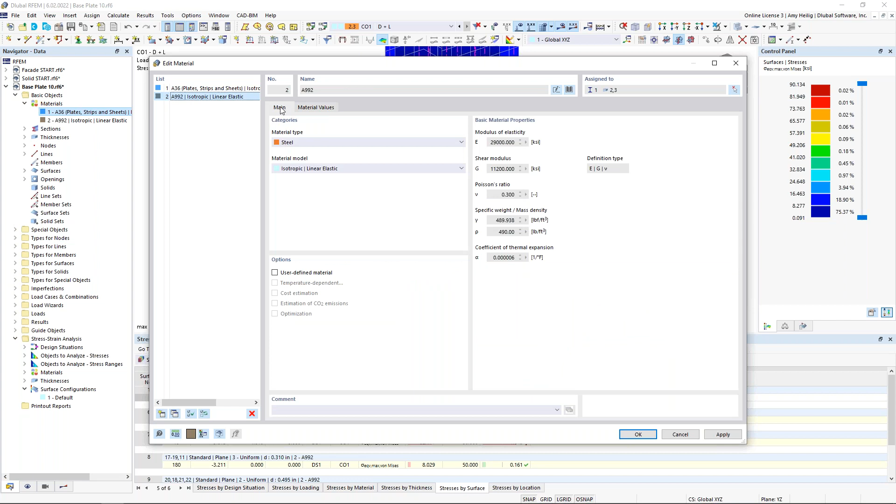For us, we're going to take advantage of this isotropic plastic for surfaces. Under the second tab, we can see the yield strength is set at 36 KSI, so essentially none of those FE elements should exceed this 36 KSI. Under A992, we can make that same change by changing it to isotropic plastic, and notice under our second tab, we have a yield strength here of 50 KSI.

Once we have made that change, all we need to do is rerun the calculation. So the program needs to go back through the static analysis, and it's also going to go back through the stress strain design. You'll notice it takes just a split second longer here because we now have a nonlinear material.

But ultimately, reviewing the static analysis for this load combination, we go back to our von Mises stresses, and maybe I isolate this based on our base plate here for my visibility. And sure enough, I look at my highest stress here and it's 35.997. So nothing is exceeding that 36 KSI.

Essentially, with this nonlinear material analysis, the program is going to apply the load. When that FE element reaches the yield strength, then the load is going to be distributed to the adjacent elements. It continues to do so until the load is fully distributed.

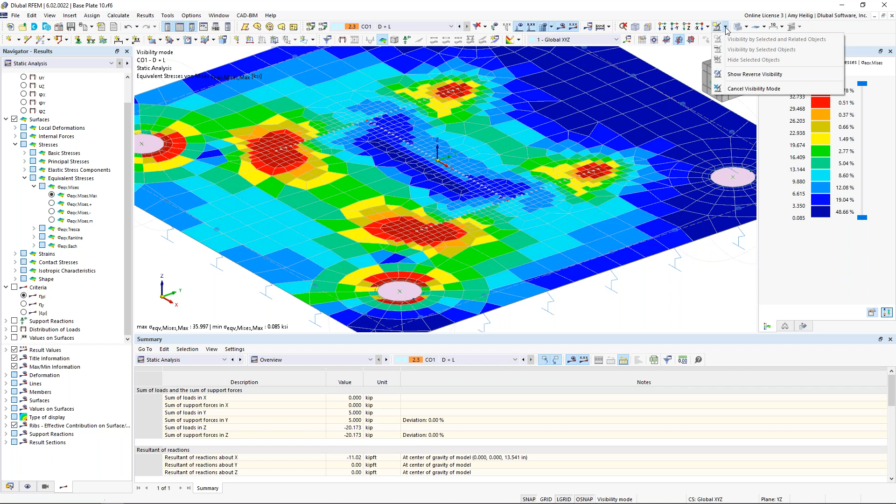And we can actually see within our static analysis as well, the option for the criteria. So we activate the criteria and the program will tell us exactly which elements have fully yielded. Perhaps we go back to our von Mises stresses and maybe I show the reverse visibility here, so we're only viewing our columns. And again, the highest stress is 49.819. I should never see any of those element stresses higher than that 50 KSI.

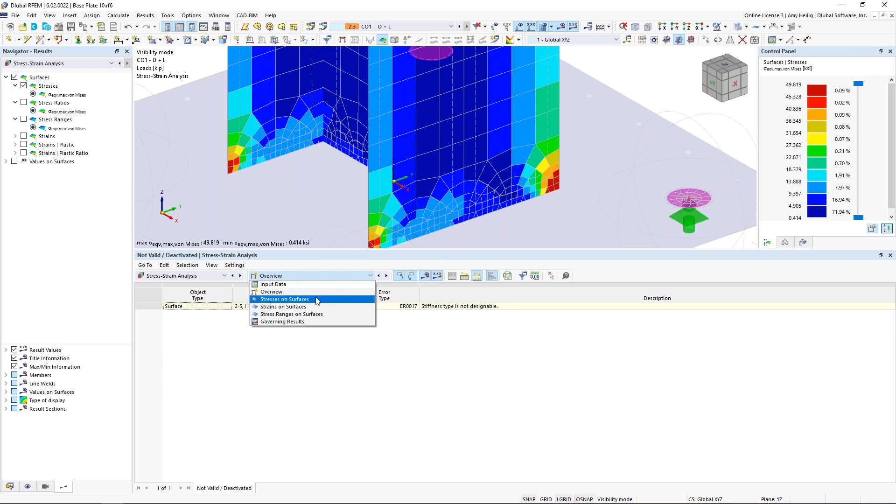So that's as far as the static analysis, but under the stress strain analysis for the actual design, we can view here the stresses on the surface, and I'll cancel out on my visibility so everything's visible in my table. I would also expect not to see any stress design ratio higher than 1.0.

So within the existing stresses is this column here, the limiting stresses either 36 or 50 KSI, and here are the stress design ratios: 1.0, 0.996, 0.989. Again, because we're never exceeding that limiting strength.

So within these table settings, we also can view the strains on surfaces. Remember, we activated that, so we see the existing strains, but we also have that limit that we input in, which is only applicable for the nonlinear material analysis. And then we get a strain plastic design ratio here as well.

And lastly, remember the stress ranges on surfaces. I said that we could activate this. We will show the minimum stress with each surface, the maximum stress, and then the total range here. Everything's synced up in the background here. We can see that red arrow showing us exactly where those high stress points are. And of course, we can view everything graphically here, such as our stress ranges.

We can view the stress design ratios, and remember that's because we use this drop down here for the stress strain analysis. That really encompasses the nonlinear material analysis.

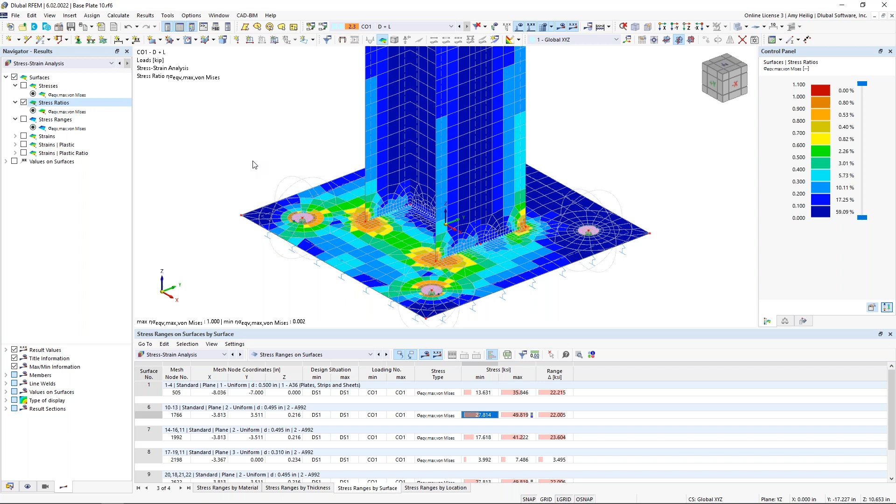The final thing I want to cover with this particular model is a new feature within RFEM 6. I'll turn off my results here, and I'll also turn off my FE mesh so this is a little bit more visible. We want to take advantage of this option under folder option types for lines, where we have the new feature, line welded joints.

This is really a post-processing tool that we can use to do the weld design. We're not modeling in the welds for the analysis, but rather we can take advantage of the program calculating the stress flow between surfaces, and we can set our weld joint here and give it the input data. We can also set the limiting stress value to get a design ratio for these welds as well.

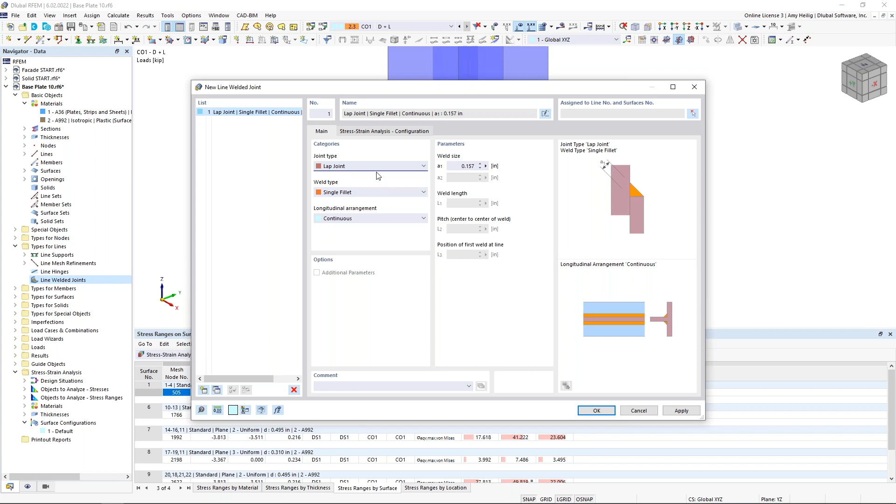So let's take a look at what this encompasses. We activate line welded joints and we have our first definition type here. The first joint type is a butt joint, but we also have a corner joint, and notice this picture updates over here on the right. We have a lap joint, and finally a T-joint, which is what we'll be utilizing today based on a double fillet.

So what we will do is specify the weld size. Perhaps I set this at 0.167 inches, and then I can graphically assign this weld to a line in my model. We'll begin with the web that is going to be welded onto the base plate.

Then I need to select my surfaces. I first choose this vertical surface, and then my second click is the surface that it's being welded to. So the order that you choose these surfaces does matter. We'll go ahead and choose surface number 8, then 1, and click OK.

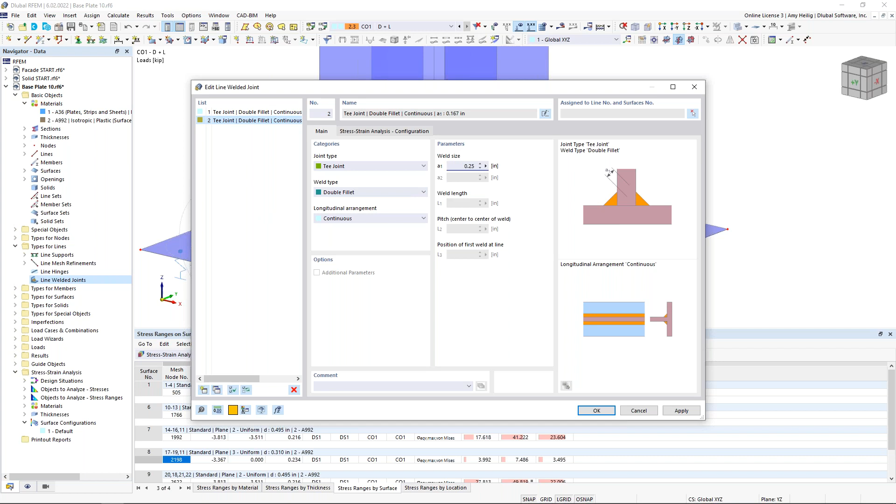I can make a copy of this line welded joint, and what I'd like to do here is modify the weld size to something slightly larger, 0.25 inches. Then I'm going to choose my line of my upper left flange. I choose my vertical surface first, my horizontal surface second, but I can remain within this dialog box to add a new object. Now I can rotate this around here.

I can choose my second line weld joint, choosing my vertical surface, my horizontal surface. I once again add a new object to choose the lower left flange this time, my vertical surface, and then my horizontal surface. One more time, I create a new object by selecting my right flange with my vertical surface and my horizontal surface, and I click OK.

So now we see all of those lines and surfaces generated here with the relevant line welded joint definition types. Now that we have defined these line welded joints, you'll also notice within my stress strain analysis that we have a new option here called line welded joint configurations.

If we take a look at the default settings here, once again we have the various stresses we can calculate based on this new weld. We have the weld throat stress due to normal loads, due to bending loads, shear loads, and so on. For this example, I'm going to activate all of these stresses here along my weld based on those various loads, and also activate the resulting weld throat stress, which combines all of these stresses into one to come up with that equivalent stress.

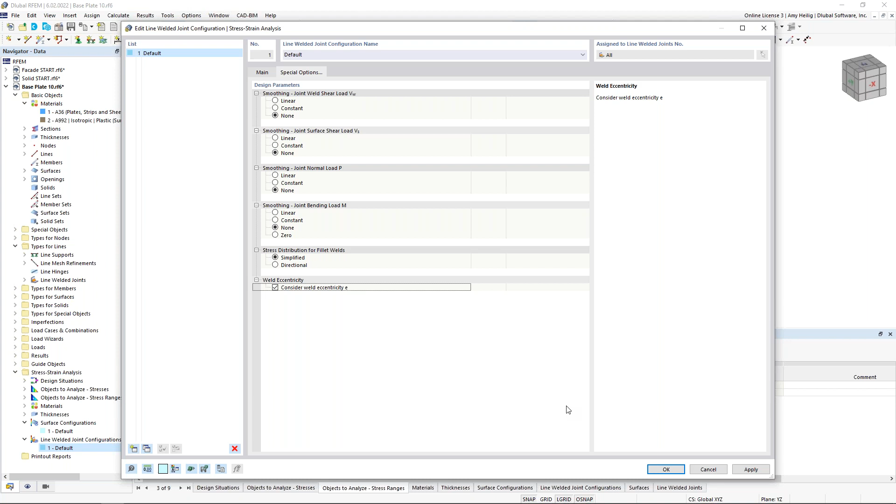The stress distribution for the fillet welds can be set to simplified here. We also can take advantage of the weld eccentricity within the calculation as well. Now that we have set all of these various settings, we also have the ability here to set the limit stress type.

So currently it's set to none, but we can use the option here, user defined, and for this equivalent stress we would input the strength of our weld. So perhaps this one's 57 KSI, for example, or whatever it may be.

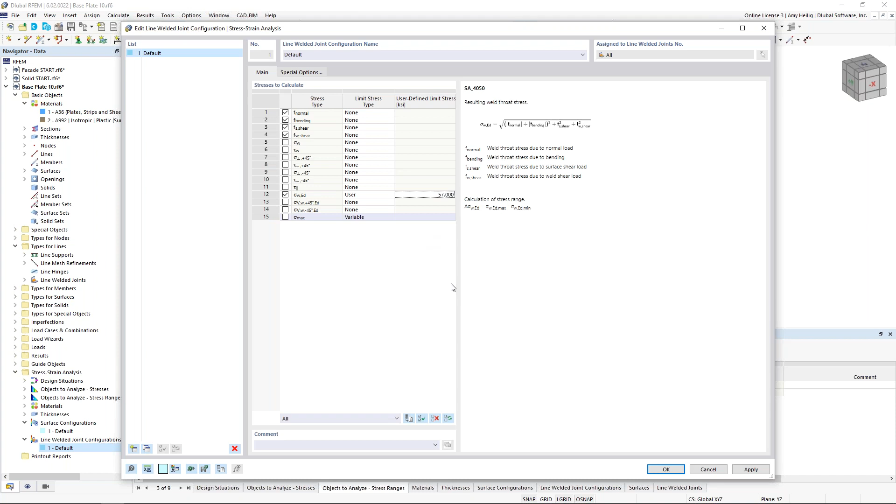Now that we're done with these configurations, we click OK, and under the stress strain analysis input data, notice we have a new option to calculate the line welded joints, which is automatically turned on. We can run this calculation directly within the table. The program needs to run through this load combination, and we're still running that nonlinear material analysis, keep that in mind as well.

We've already covered the stress design of the surfaces, so rather what we'd like to do is take a look at the stresses in the line welds.

I'll turn this to wireframe view. We can zoom in here to see exactly what's happening. For each one of these lines where we applied the welds, we have the existing stresses, our limiting stress for that equivalent resulting weld throat stress, and then we get a stress design ratio as well.

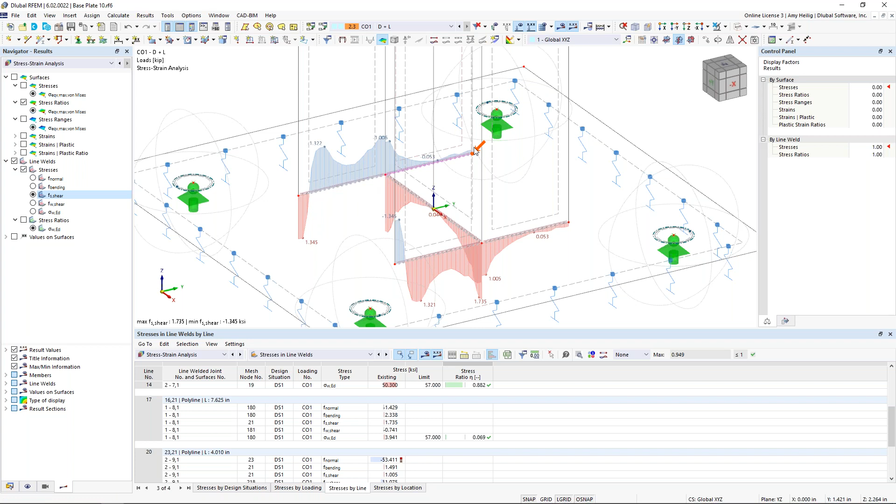We also have the options to view these graphically, and you can see the line weld stresses. We can change the view of these. That option to smooth over the results is what I was referring to. Essentially, the program can set this to a linear distribution, or constant, if we're maybe comparing to hand calculations. Otherwise, we won't have any smoothing going on. And of course, the stress ratios are shown here as well.

Kind of a great new feature that we added within RFEM 6 that will be helpful for some of these FEA connections. All right, so we will move on to our final example today, and this one should go rather quick. This is a 3D solid.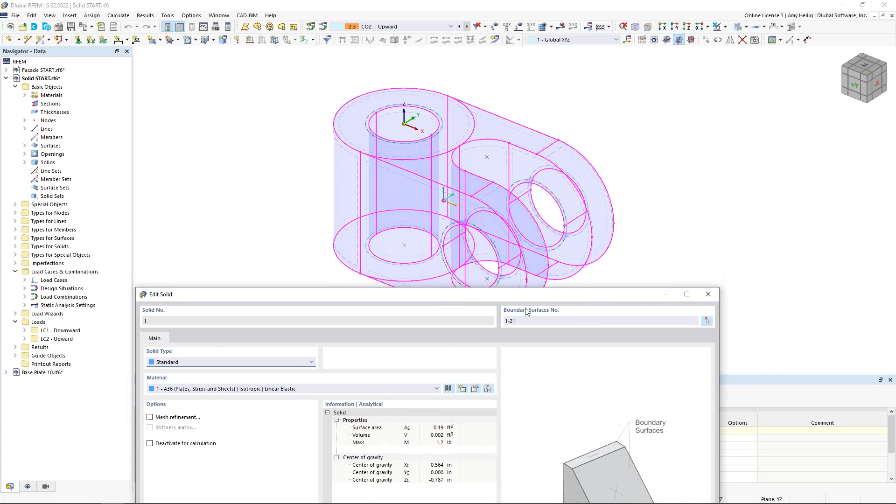Notice that I went ahead and modeled everything here, and we have all of these available surfaces in the model. When we're modeling solids, we set the boundary surfaces to define the solid by choosing the stiffness type without thickness, so there's no thickness, no material. We're simply using them because when we generate our solid, notice we have the boundary surfaces. And with the solid element, we do need to give it a material. In this case, I gave it the material of A36.

I also have a couple load combinations already generated. We have an upward load here right through the openings of this solid. We also have a downward load. These two load combinations are going to be categorized under my design situation.

We want to right click here to visit our base data, and this is where we can turn on that stress strain analysis. We click OK, and now we get that additional folder over here on the left. Similar to what we saw previously, we now have a solid configuration. We double click on this, and of course this list looks a little bit different because now we're working with a 3D element, so essentially FE elements in all three directions.

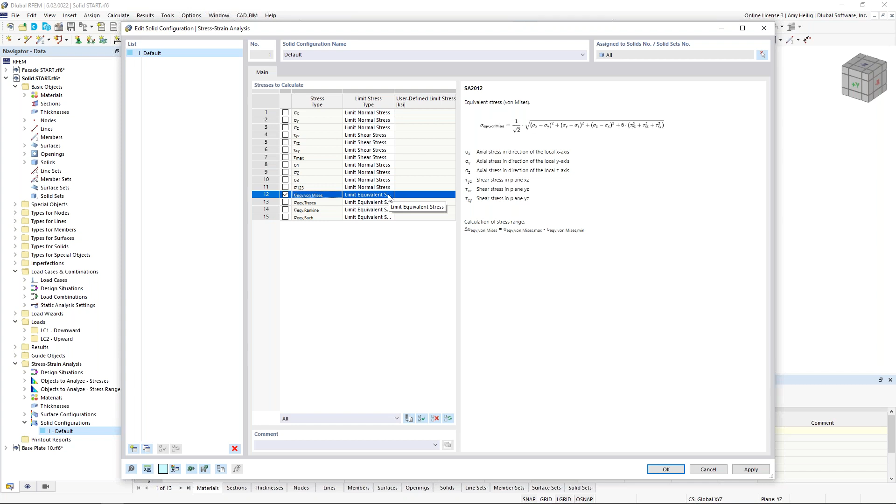We have some suggestions here, such as the maximum shear stress, the maximum axial stress, but we'll go ahead and just check the von Mises stresses once again. We see the relevant equation given to us here. The program should refer to that 36 KSI for the limit equivalent stress.

Once we have set the configuration settings here, we can click OK. And under the stress strain analysis, we can take a look at the design situation as listed here, but under the objects to analyze, we don't want to design these surfaces. We'll actually just end up getting an error anyway that we can't design them because there's no thickness or material assigned to it, but we will design this solid.

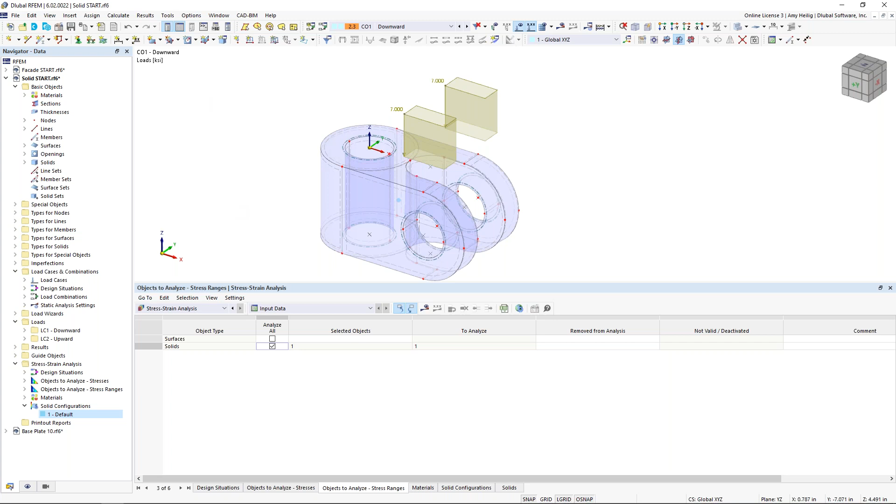We also can activate that stress range if we'd like. And realistically, we can run our calculation, so we go to calculate, calculate all. Very similar workflow here for our 3D solid. We're going to essentially calculate the load combinations, and then once the program is done doing this, it will move on to the stress design within that add-on. Now notice this does take a little bit longer because we've introduced FE elements now through the thickness of this object as well. But once we're done with the calculation, we're currently viewing the static analysis here.

We can take a look at our stresses, for example, such as the von Mises stresses. And we see the von Mises stresses for that downward load as well as the upward load.

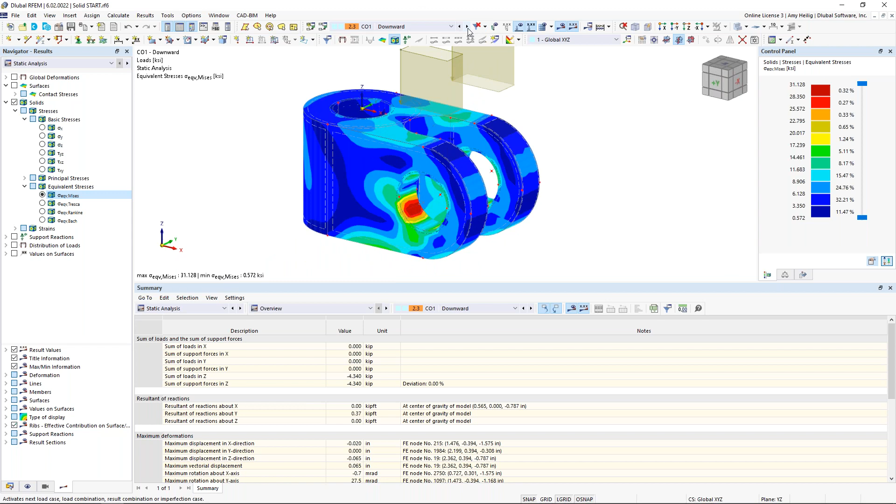Jumping to the stress strain design, we can view the stresses on the solid. We see here the existing stress from the von Mises, our limit stress of 36 KSI, and that stress design ratio here of 0.865. We also can view those stress ranges on the solid: the minimum stress, the maximum stress, and the stress range.

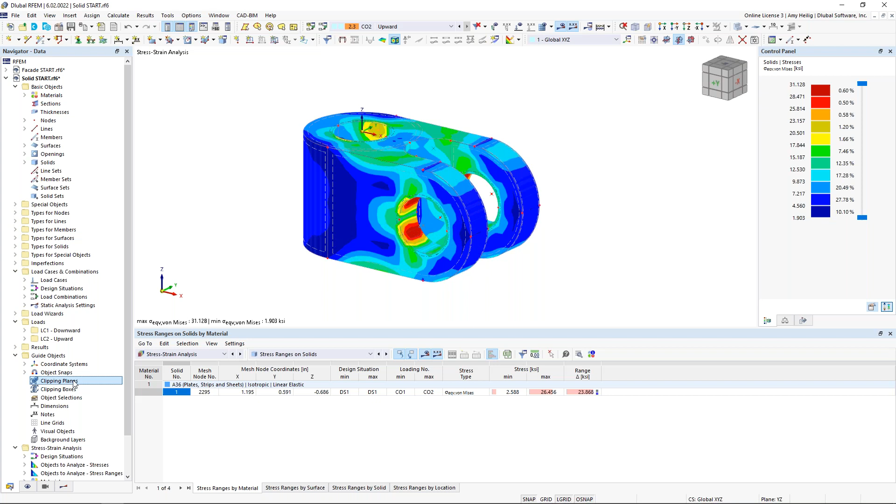Just a couple of quick features I wanted to point out with the solid element that are either new or improved within RFEM 6. If we go back to our navigator under the data, we have under the guide objects what's called clipping planes and clipping boxes. If we create a new clipping plane by double clicking here, we can create multiple clipping planes at angles.

We can define them by 3 points, or we can simply offset from the XYZ axes. So perhaps I set this parallel here to the YZ axes, and I can set my origin graphically by clicking within the model. I click OK and set. Let's go back here to the static analysis, and we'll view our von Mises stresses.

Notice you now can view those von Mises stresses throughout the depth of the element, or in the interior of this solid. We also can go back to that clipping plane. We can double click to edit it, to invert it, if we're interested in seeing the other side of those von Mises stresses. So you can see that we can create multiple clipping planes, and we can simply turn them on or off.

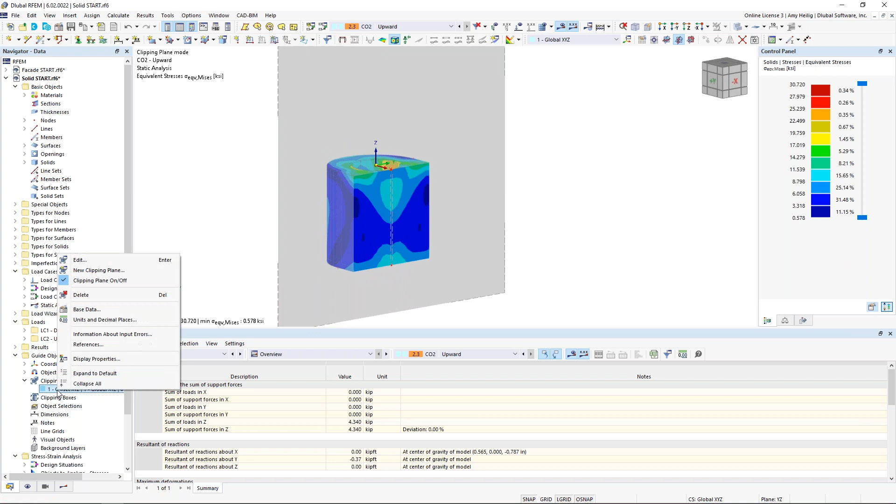By right clicking here and deactivating it. And now we're back to the full view.

Same concept for the clipping boxes. So we can create a new clipping box here, and we set the origin. And this time with the clipping box, we need to give it 3 dimensions. So we'll give it maybe 1 inch in the X direction, 1 inch in the Y, and 6 inches in the Z. I click OK and set active.

Now we have this clipping box throughout the depth of that solid to view the stresses in the interior within these defined settings. Again, we can see the clipping boxes here can create multiple definitions and can turn them on or off by just right clicking. So that's a little bit more efficient now in RFEM 6 for viewing various results with those solid elements.

Okay, so the final thing to touch on quickly, as I know we're running out of time, is just a very quick printout report.

We can create a new printout report up here in my toolbar, or we could create it down here in our navigator. We create a new printout report definition here. Notice the program gives us all of the various input as well as results that we can turn on and off. We also can load some saved templates here.

So we have default templates, including the stress strain analysis, where we've turned on some of the information we think you'd be interested in. You can create your own template for the printout report.

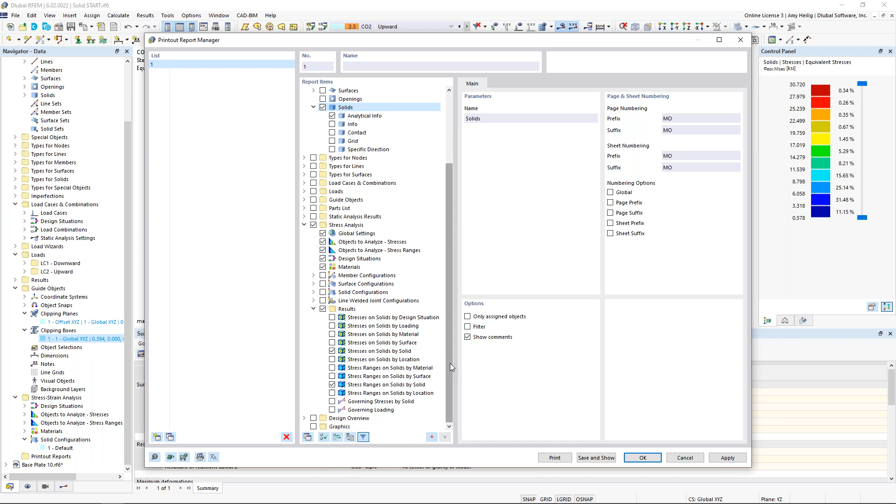We'll view here the stresses on solid as well as the stress ranges on solid. And I can simply click Save and Show. What the program will do is to open up a separate application here for my printout report.

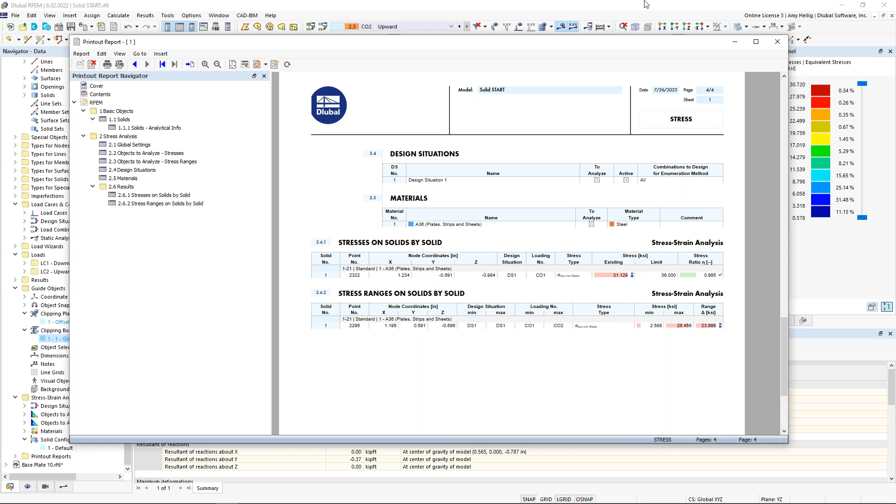But what we can do is to actually drag this printout report maybe to a second monitor and work concurrently within the RFEM program. So any modifications will actually update in the printout report in real time. And perhaps we'd like to add just one graphic to this printout report quickly. Currently I'm viewing my results here for this upward load.

And remember, we have this set at our von Mises. So I'm going to add this particular picture to the printout report. Well, we have a nice feature here under the display, and it's called Isobands.

This is new within RFEM 6, we can activate what's called the gray zone. The gray zone allows me to set certain percentages of stresses that I'm not so interested in, so notice those low stresses are now grayed out. We can continue to increase this until we're content with viewing only the stresses that are of interest, and everything else, those lower stresses not of much interest, is grayed out. So we're ready to add this particular graphic to our printout report.

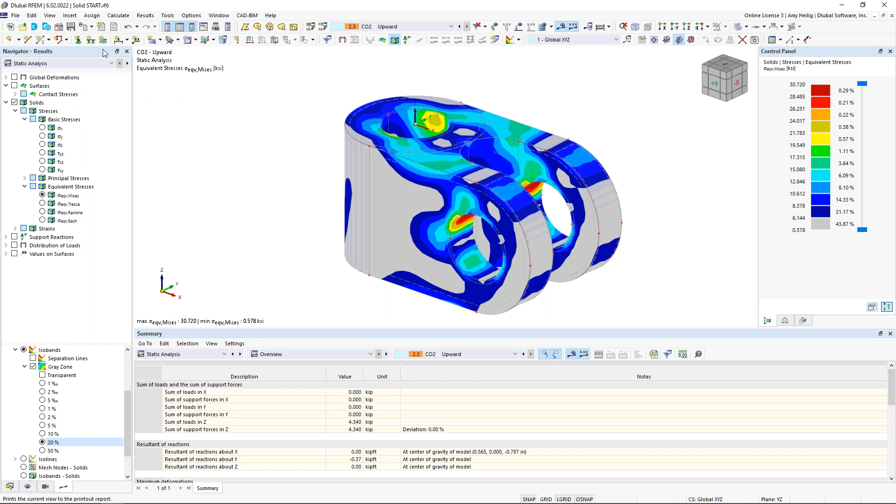So we can go up here to print the graphic to the printout report. What's also nice is that we can make some changes here. Notice this is set to window filling, so the picture is zoomed in to take up the entire page width. But I'm also going to activate the 3D picture in the PDF. This is currently off by default, but we'll activate it. If I click Save and Show, I'll drag my printout report back, and we'll see this picture added to the printout report.

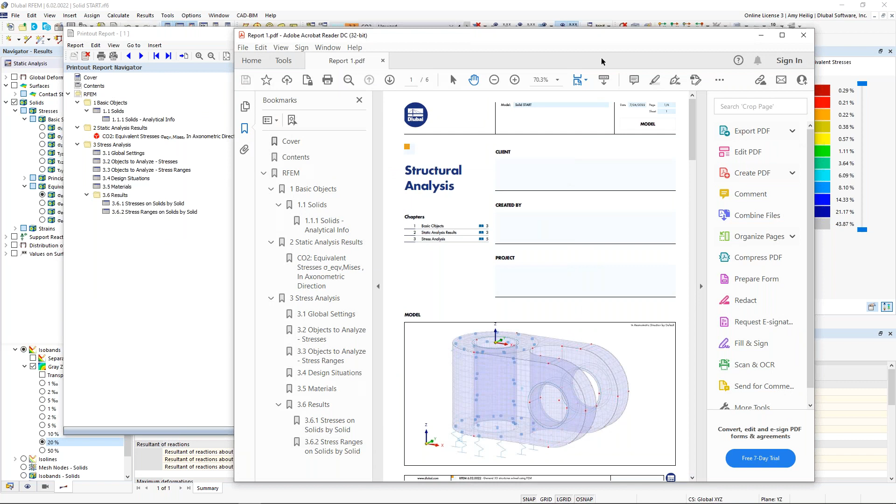Now, nothing seems so special about it now, but if we take this report and export it to a PDF, choose some location on our computer, and save it, the program will automatically launch whatever PDF application we're using. In my case, I'm using Adobe, and we see the same printout report. But if I scroll down to that picture I just generated, what you'll find is that this is a 3D picture.

This is really nice in the sense that within this PDF, we now have the ability to rotate and view those different stresses however we see fit. It will be nice to send to clients, especially for objects where we don't want to create multiple printouts of different orientations of the stresses, but rather we can just send them this 3D picture directly. So I just wanted to mention that's a nice feature within the program.

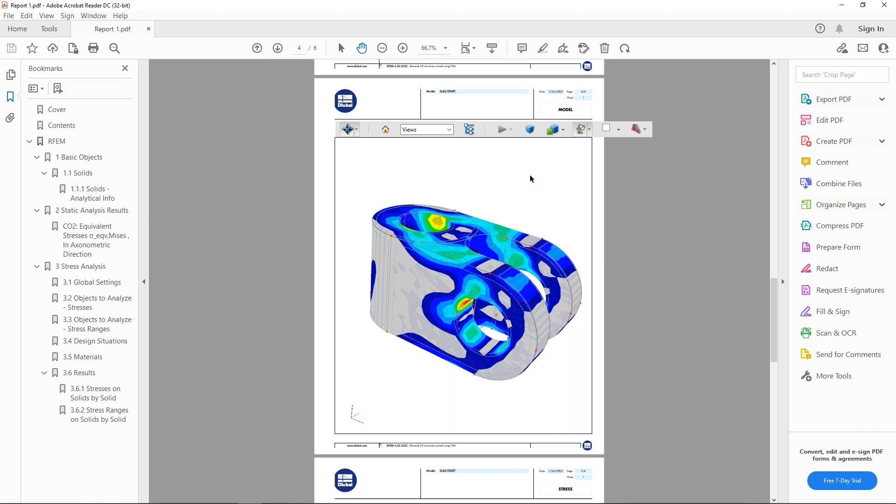All right, so we will go ahead and conclude our webinar today.